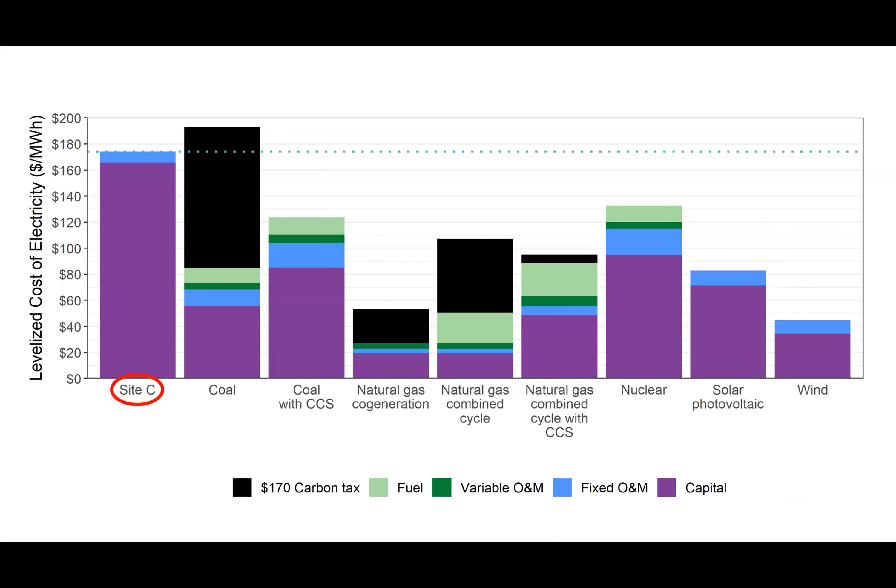Here's that levelized cost with that larger capital cost of 16 billion. You can see Site C at that cost is very expensive, more expensive than any other technology in our model, except for coal if you put a $170 a ton carbon tax on it.

But levelized cost isn't going to give us the full picture of the value of Site C. You can't directly compare Site C, which is dispatchable, with wind energy, which is not dispatchable, based on levelized cost alone. So we start with this analysis thinking there might be additional value that Site C has when operating within a system, helping provide dispatchable capacity. Let's evaluate that value and get a sense of how valuable Site C is.

For this work, we're using a linear programming model. The basic framework is the same as the 2018 paper, but there we looked at all the provinces; here we're just looking at two with greater detail. It's co-optimizing several things: when we run a modeling scenario, the model decides which technologies to invest in and build, whether to build transmission between balancing areas within and between provinces, and whether storage facilities should be built.

Then, based on the available capacity, it's also dispatching these technologies over the course of a year for each hour, and dispatching transmission between regions. To give shape to this model, we have intra-provincial demand detail, generation detail, and transmission detail.

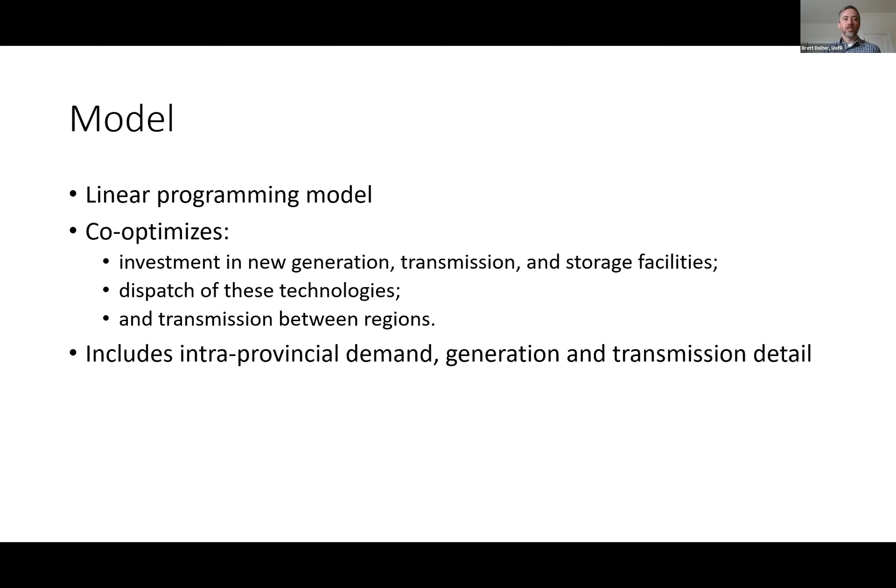That would be ideal, and we'll keep hoping... pardon me? Oh, okay.

For Alberta, we're using data that is actually regional. Alberta's AESO has planning regions with hourly electricity demand, which we then aggregate to the economic regions.

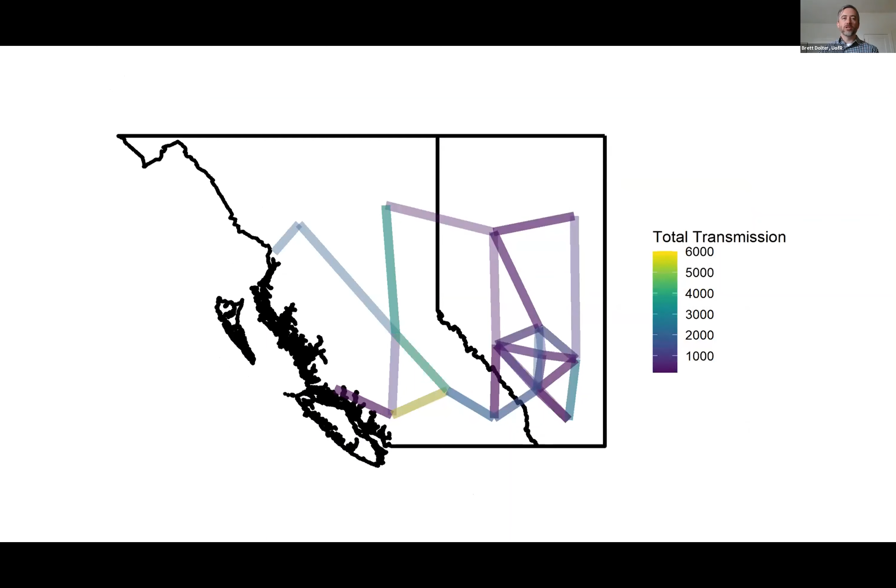We have rich wind and solar data, and when we started this modeling work, we really wanted to see, based on the resource that's available, how greater wind and solar generation would play a role in electricity futures, and what would be needed to balance it.

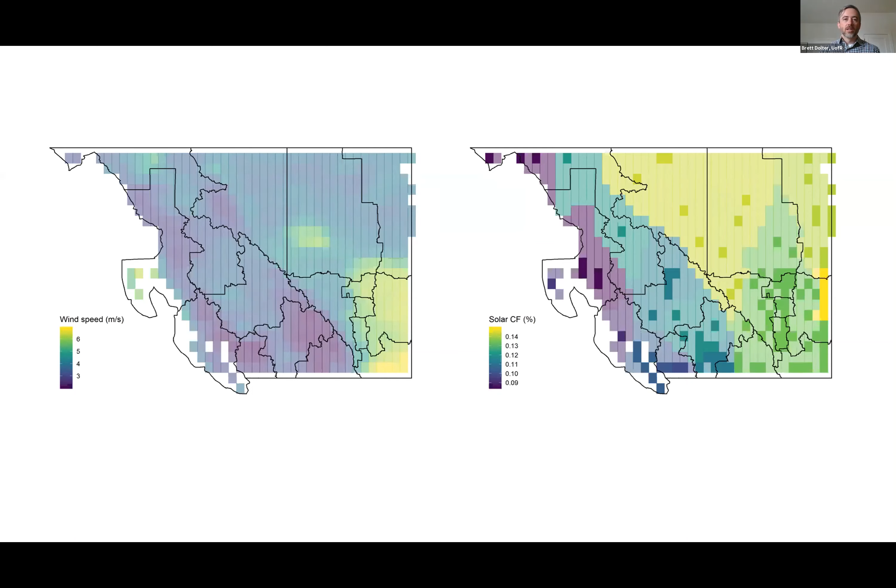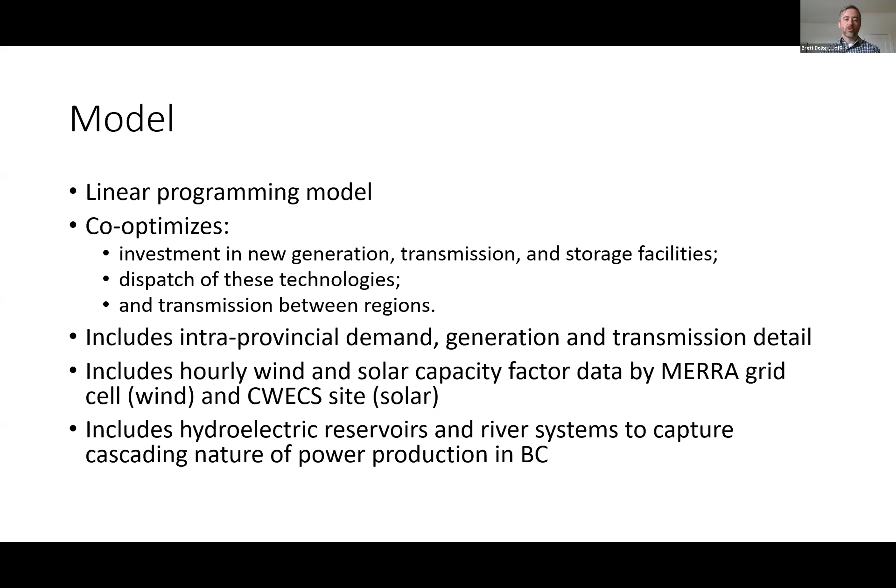Because BC is a hydro-dominated system, and it's important to capture how that system works, in this version of our model we've really worked to give greater detail to the hydroelectric system in BC, characterizing the river systems and the chained nature of hydro on the Williston Basin. The generating station there is GM Shrum, and output from that station becomes an input to the Dinosaur Reservoir.

My internet is unstable. Can you hear me okay? If not, let me know when I can turn off my video. Still okay? Yes, it's a bit unsteady. We're losing you a bit. Yeah, maybe let me turn off my video and see if that will help.

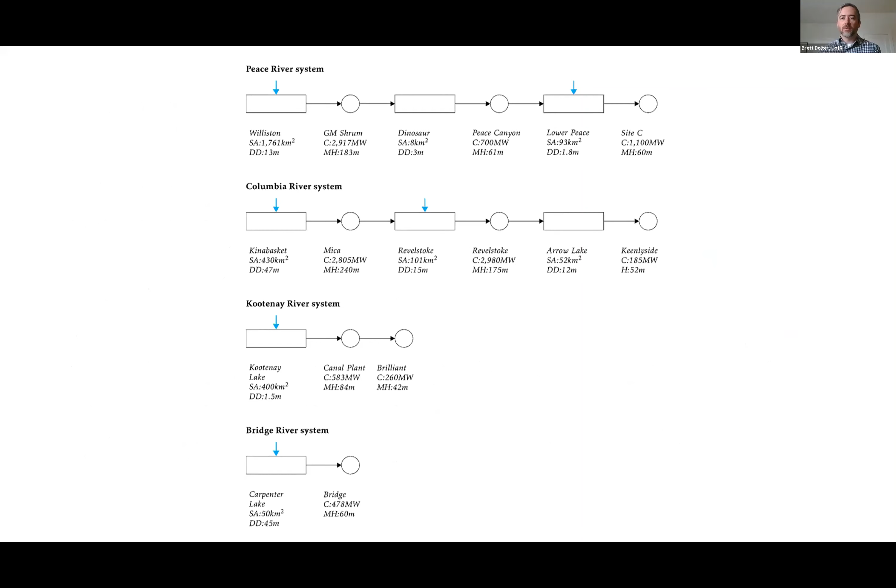So there's the chained nature of the hydroelectric system. Output from one generating station becomes an input to a downstream reservoir. So we've worked to characterize the big hydro assets within BC to have that more realistic modeling of hydro in BC.

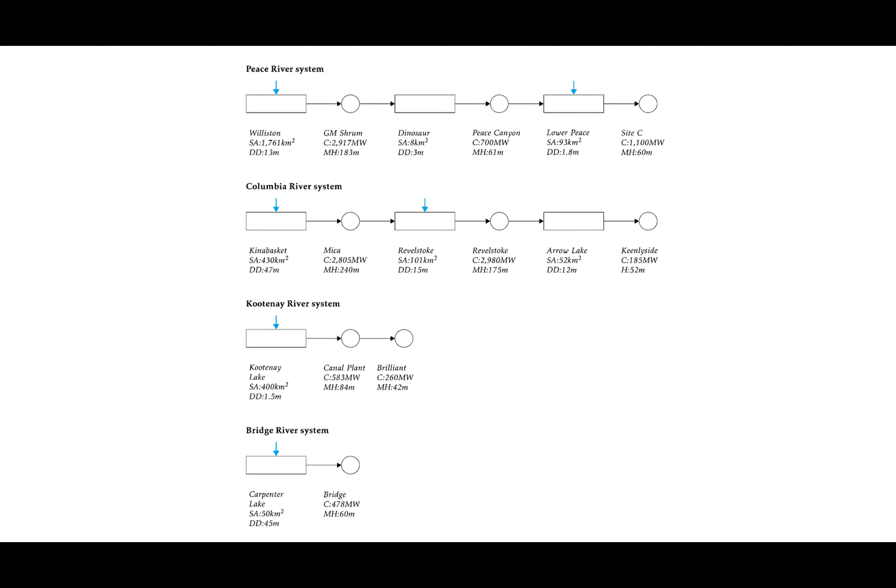Now, of course, the constraints, the ones you'd usually expect: you've got to have electricity supply greater than or equal to demand in each hour and each balancing area. So we have costless curtailment as one assumption we've made. Supply can be greater than demand.

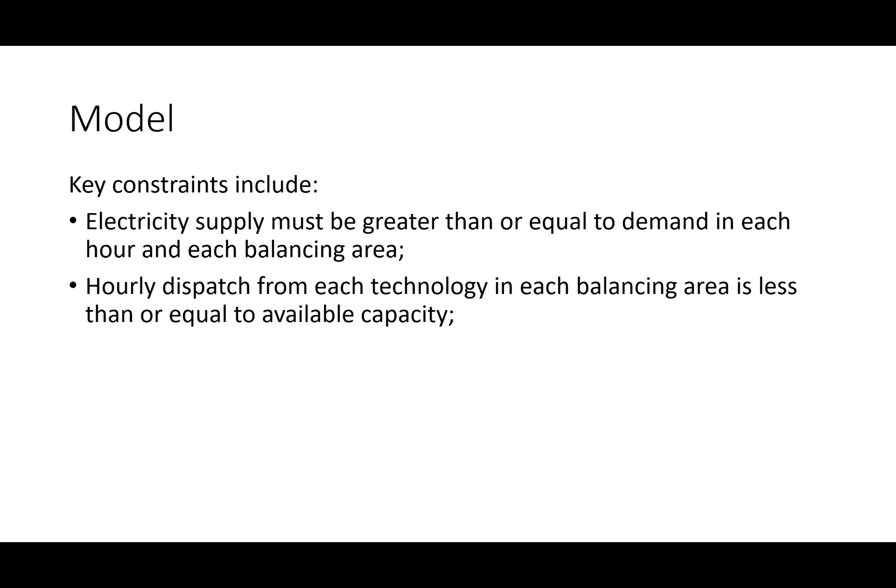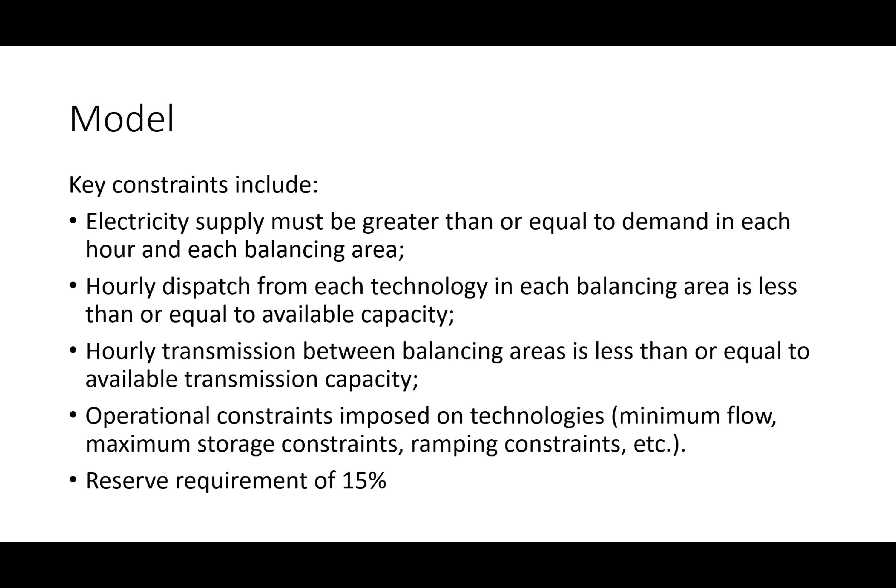You can only run what you build, so dispatch has to be less than or equal to available capacity. Transmission, same thing - you can't trade what doesn't have transmission to transmit. And then we have constraints on the minimum flow requirements for hydro facilities, maximum storage constraints for the reservoirs, ramping constraints for different technologies, how fast they can ramp up or down and respond to changes in demand. And we introduce a reserve requirement of 15%.

So we run this model for each scenario we want to evaluate. We run it with Site C assumed to be built within the model, and then we run the same scenario with all the same settings with Site C not in the model. That's going to give us an idea of what is the replacement value of Site C - if you have Site C present in the model, how much are you saving, and how much are you not having to build?

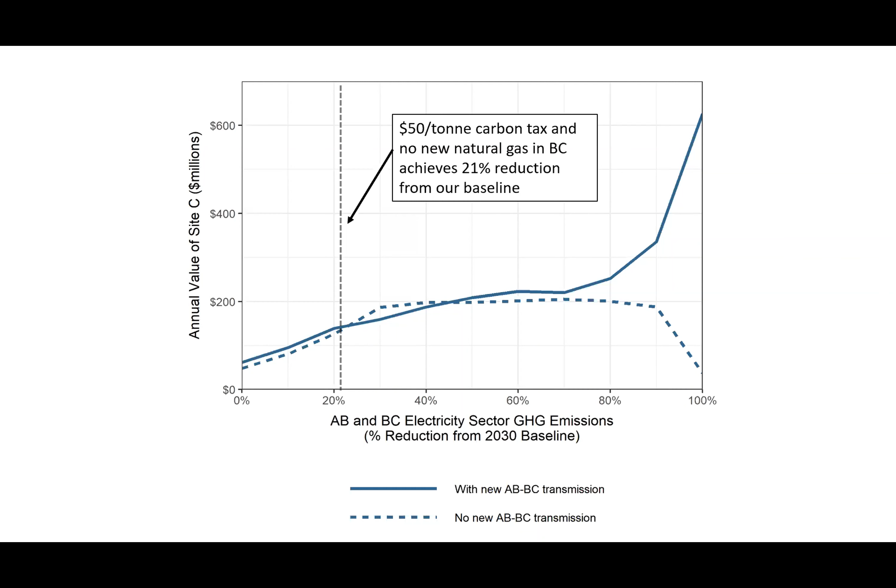It does increase with higher levels of demand. Site C is more valuable. So we include that in our net present value, that the value of Site C is growing as demand grows. But if we take that annual value, assume it grows over time, and calculate net present value over 70 years, the expected life of the hydro facility, here's the net present value calculations we get.

I've put on the graph the total cost of the Site C project with this new $16 billion budget, but also a line showing the avoidable cost. When Premier Horgan announced he was going to continue Site C, he said we want to continue because if we stop now, we would already have spent a little over 10 billion, and so we'd only be able to avoid 5.8 billion. So we get that avoidable cost of 5.8 billion.

We can look at, does Site C achieve it? Does its cost exceed the net present value that the project creates? It exceeds it for every scenario—the total cost is higher than the value created. But for only two scenarios that we run, is the value created greater than that avoidable cost.

Only if you're working to get to 90% or 100% reduction in emissions, so near zero or zero emissions, and you have collaboration between BC and Alberta, do you generate value that exceeds that avoidable cost. From an economic perspective, it's that avoidable cost that is relevant to the decision. The other 10 billion is a sunk cost that as rational decision makers we can ignore. It's that 5.8 billion we need to evaluate, and only in two scenarios do we exceed that value.

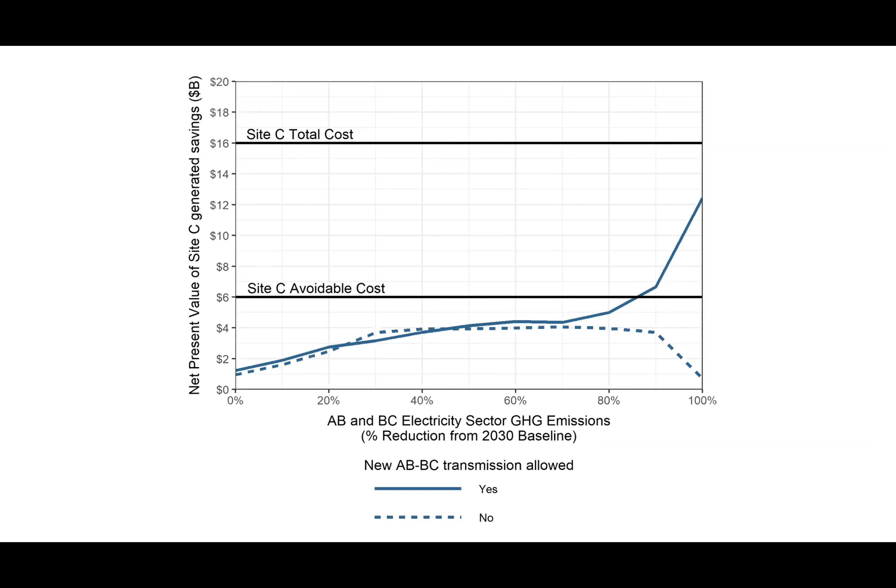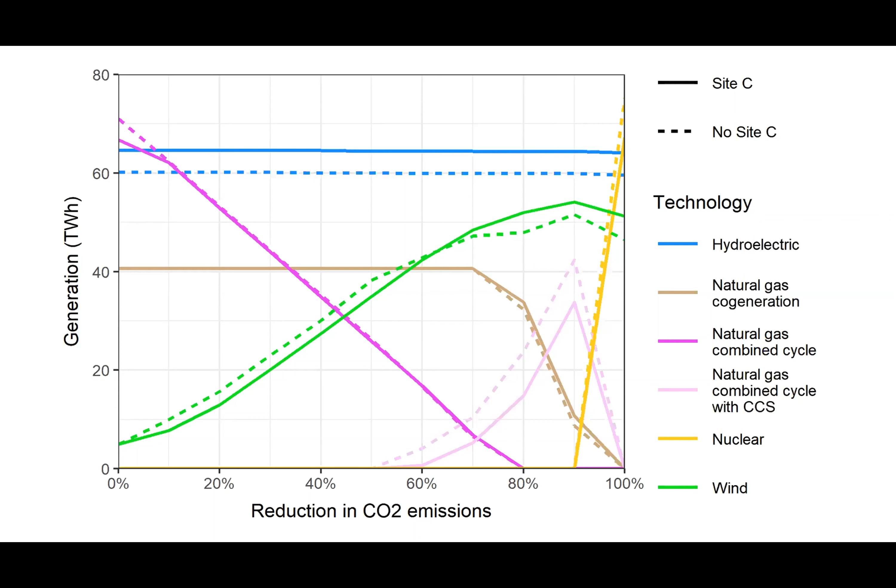Carbon capture and storage—I live in Saskatchewan, we know that was an expensive project at Boundary Dam 3. Nuclear power plants are also frequently subject to cost overruns. So we want to look at how sensitive our results are to the cost of those technologies.

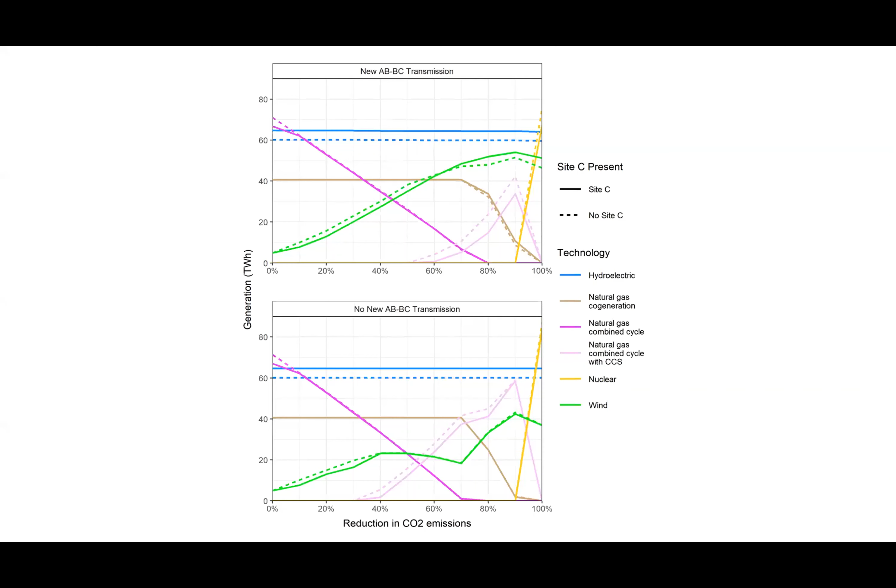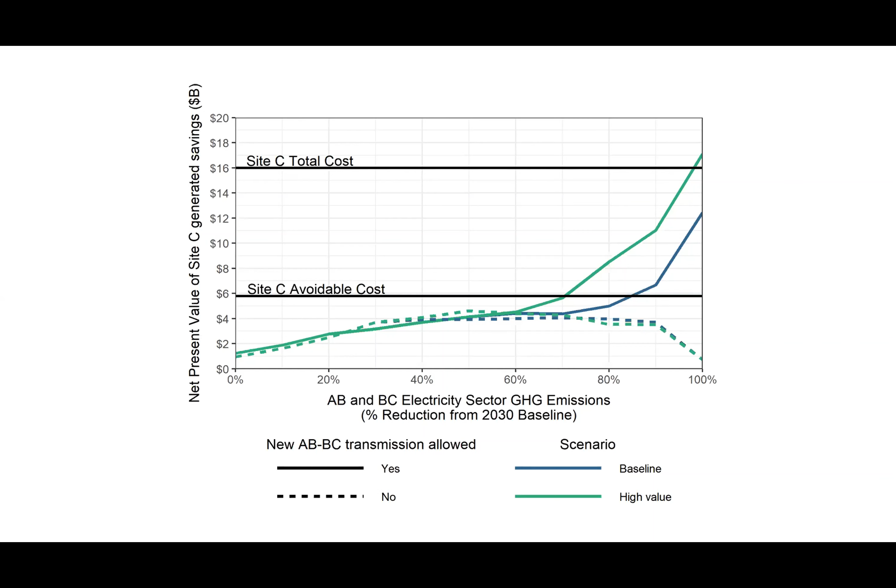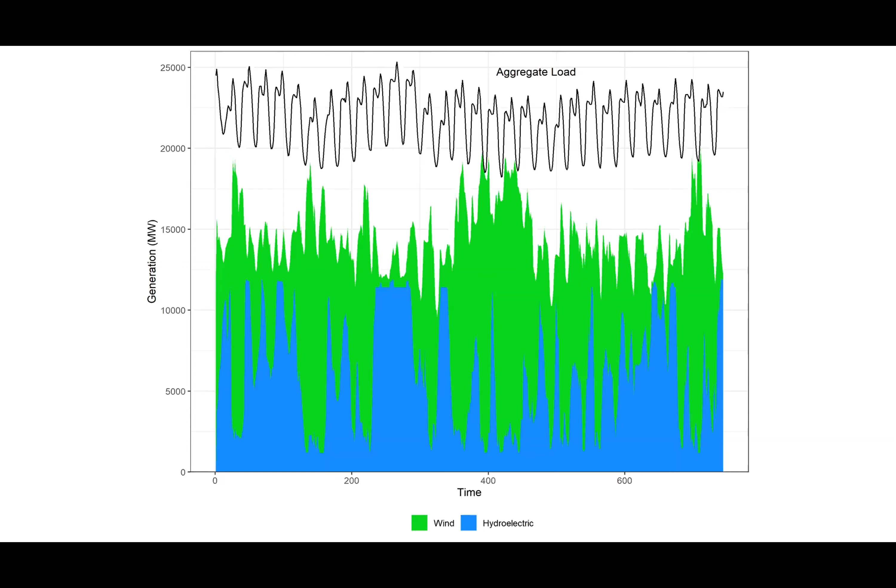So there's a complementarity between wind and hydro in the model. Aggregate load is the top, the black line. And we see the same if we do just a scatter plot of output from wind and output from hydro. There's that relationship that when wind is strong, we lower the hydro output, and when wind dies down and we're not getting the generation from wind, we have more hydro output.

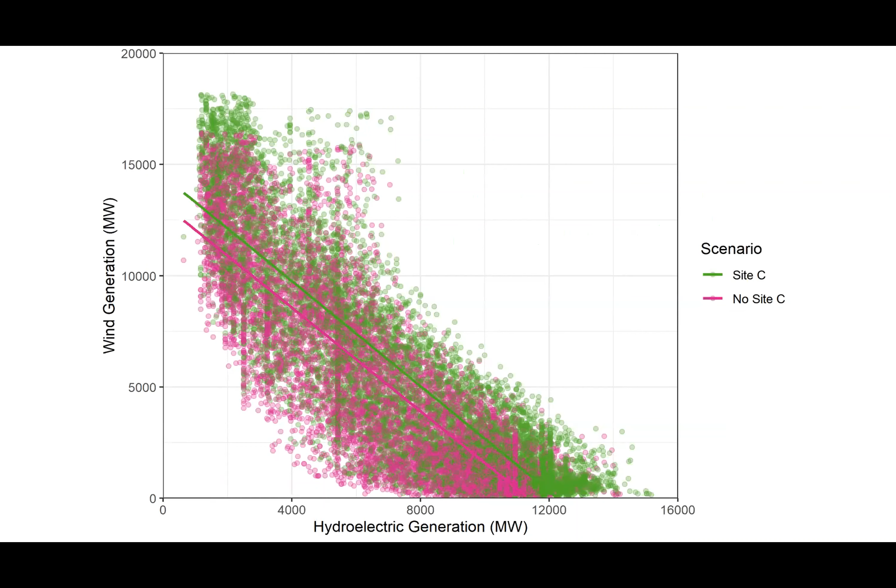And the last thing I just wanted to show you is that we're looking at the value of Site C, so we're looking at scenarios with and without Site C, but the transmission assumption is actually pretty important. So if we just look at the value of transmission, assuming we can build it or not, and compare scenarios along that line, we see that transmission has quite a high annual value.

So this is, if you allow new transmission to be built between Alberta and BC, the value of that transmission is high, and it increases as we work to decarbonize. And so some of our future work, we're going to look more at that transmission value and what we can do there to encourage transmission and evaluate its cost effectiveness for situations like this, where you have a hydro neighbor like BC beside a province like Alberta with a very strong wind resource.

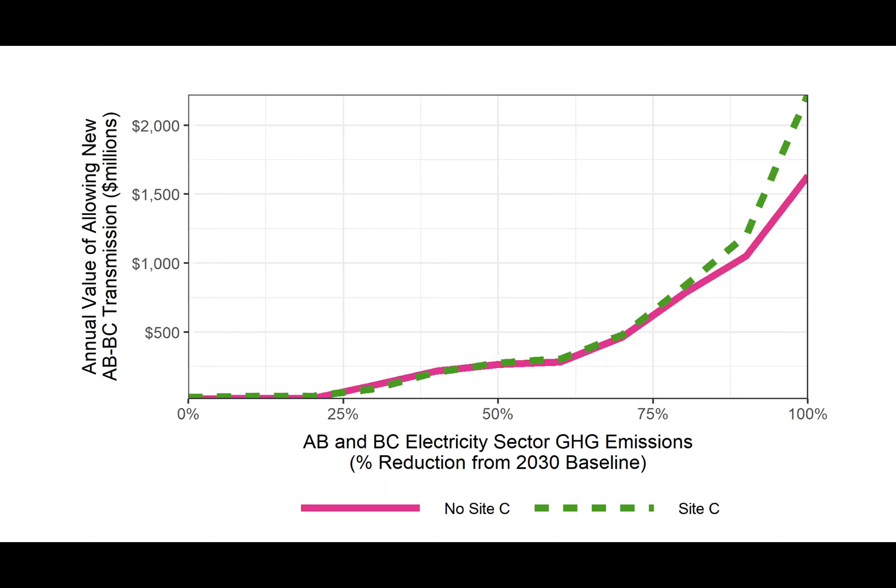This was constructed from 1909 to 1913, and because costs went up, the city of Prince Albert stopped the project before it was completed. They had a debt at that time of $3 million, which in those days was a lot of money, and they only finished paying for it in 1965, over 50 years later. So these hydro projects can be expensive, and other places have abandoned them in the past and have had to live with the debt. BC has now decided to go forward with it, unless perhaps they find more cost increases.

But let me stop there and take any of your questions.

Thank you, Brett. It was an interesting presentation. There is already a question by Andrew. Please, Andrew. Good afternoon, Brett. Two questions, and maybe I'll place both out there, but if you want to answer one, maybe other questions from other folks should go first before my second question.

My first question is, did you take into account the total power demand growth of aggressive electrification for climate change? I look at your demand graphs and it seems like there's 70 terawatt hours of demand, which to my mind doesn't address electrification. BC's energy portfolio at the moment, only 17% of our entire energy portfolio is electricity, 83% is fossil fuels. So if you compare on a joule by joule basis, and account for perhaps clever transportation schemes that are more efficient, electrical engines are far more efficient, we've still got to double at minimum our electricity system in BC, and we currently use 60 terawatt hours. So when you look at the value of Site C, to me it's very important that you do it through the lens of future demand by 2050. And if I'm mistaken, forgive me, but I didn't see that significant doubling and quadrupling of power that we're going to need if we're truly going to address climate change.

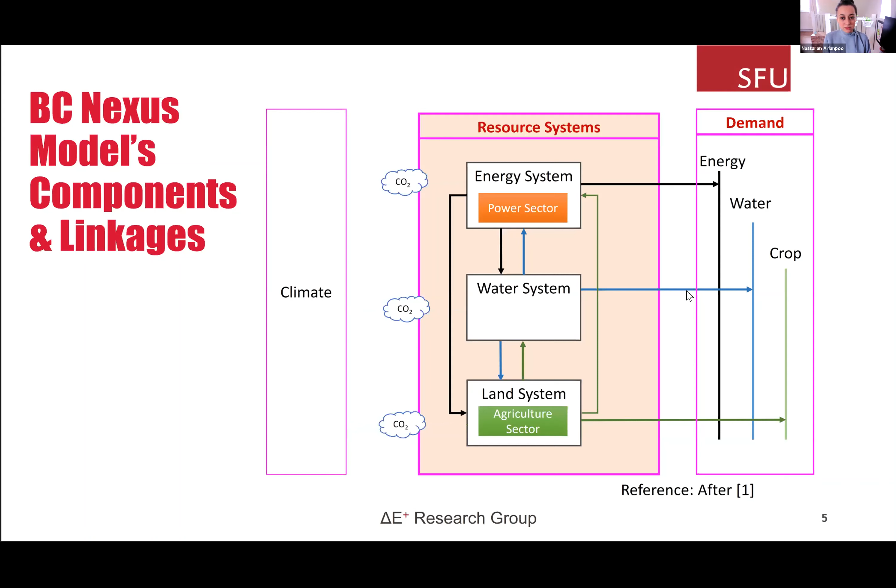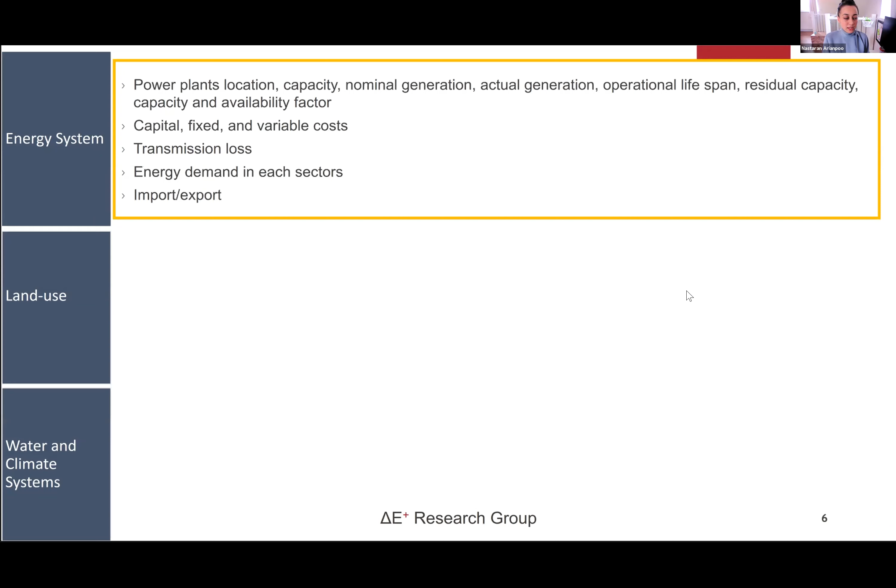When we designed the structure of the model, we calibrated it with the BC portfolio. Within the energy system, we collected data such as capacity, nominal generation, actual generation, the lifespan of the power project, the residual capacity, cost information, the energy demand from different non-electrical fuels in each sector like residential and commercial, and data about import and export of fuel.

Within the land system, we collected data such as the land use type, sizes, and demand projections for the modeling period. We also provided the model with crop suitability estimation data for each part of BC, so we can give the model a chance to expand agriculture to meet future demand. We use the model named Global Agroecological Zoning to provide this data for our model.

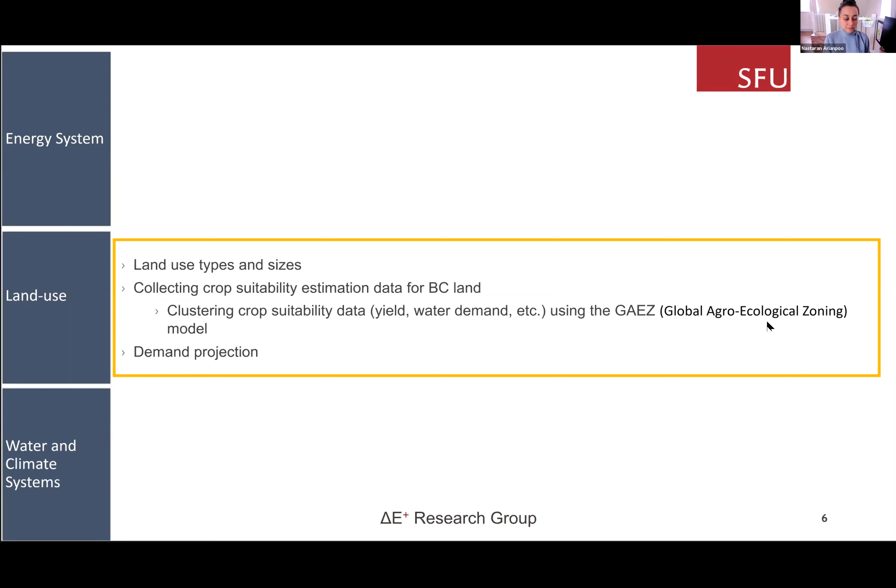The current version of the model, which is the first version, only tracks water demand and availability and CO2 emissions. So it's not a two-way interaction at the moment.

One important piece of information in the model is forest carbon uptake. Forests can play an important role in climate change by absorbing CO2 from the atmosphere. In our model, we can assign a negative value of variable cost to forest land, so the model includes reforestation considerations within the optimization analysis.

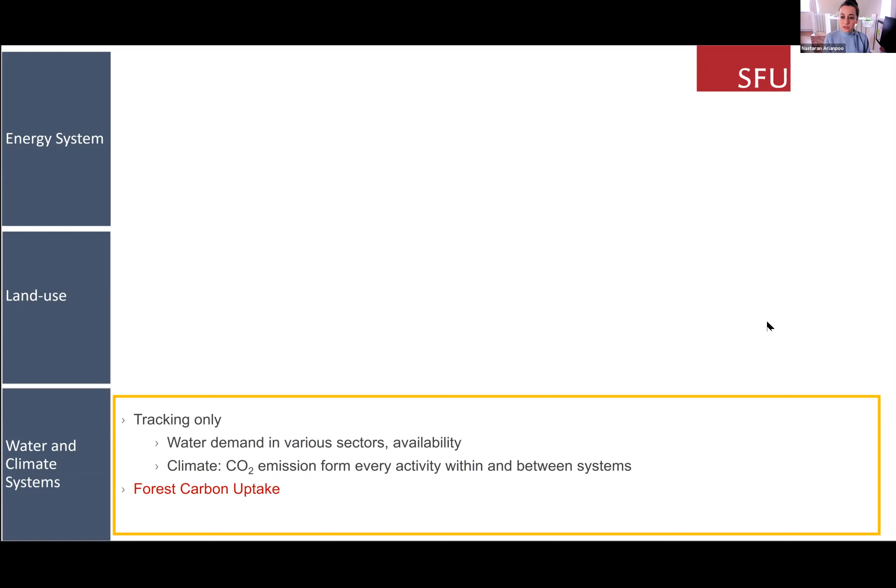However, at the time of preparing this presentation and EMI report, there was ambiguity about the role of Canadian and BC forests in how much they absorb CO2 compared to how much they emit. So in the scenarios we're reviewing today, we didn't include this option in any of the scenarios.

Three decarbonization scenarios were investigated for BC between 2030 and 2050. Our baseline scenario was based on Canada's Energy Future report published in 2019. We chose this as our baseline because the report takes a very moderate approach toward the electrification and decarbonization of BC's energy.

The other scenarios, scenario 1 and 2, are variations of this baseline with more aggressive electrification toward the 2030 and 2050 energy system. In the first scenario, we did not put any carbon penalty in the model. In the second scenario, we put a carbon penalty in the form of a carbon tax to investigate the changes.

So we investigate three scopes in these scenarios: first, the technology mix in the power system to meet demand; second, the magnitude of impact on water and land; and third, whether we can meet the CO2 emission targets in BC.

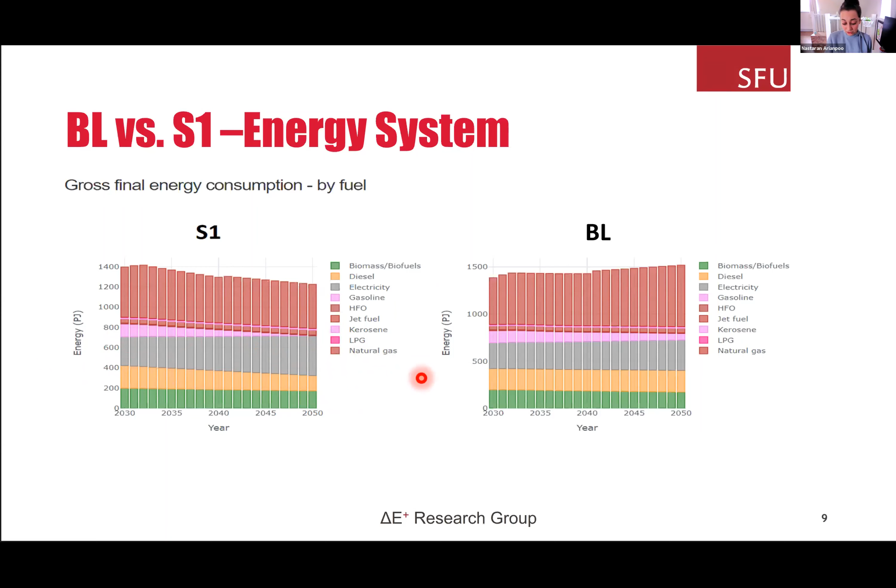That's because the model just used the natural gas as a standby to serve as a reserve margin. So that means we are building capacity that we may never use, just because we need to provide a stable supply.

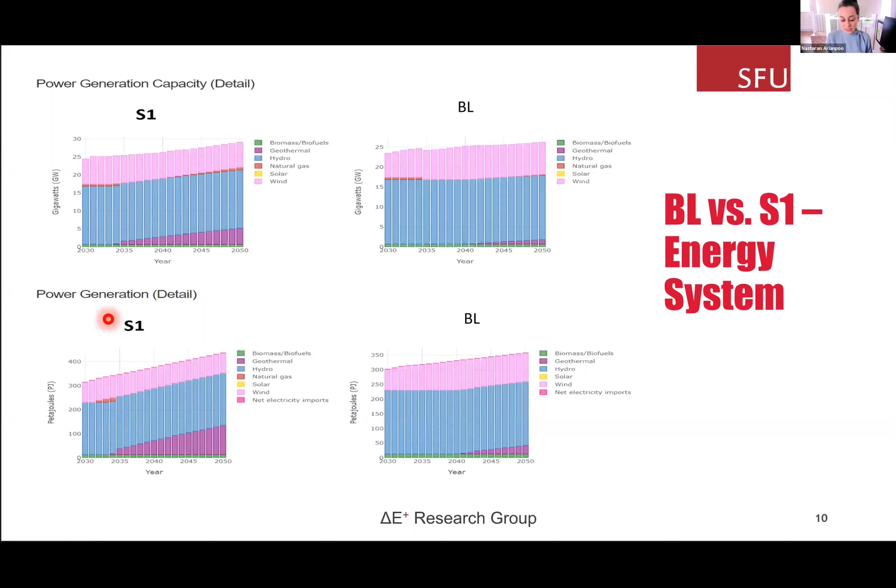The first encouraging observation of this scenario is that the impact of electrification in the residential, commercial, and transportation sectors is low on the land and water system based on the model output.

And the reason can be that the model didn't decide to further invest into solar, which reduced the land use. There is a low biofuel demand from the agriculture sector in BC, which again reduced the land use from power generation, because most of the biofuel demand in BC comes from municipal waste and forest. Also, because we did the electrification, we were moving away from fossil fuel, which minimized the impact of the power energy transition on water use.

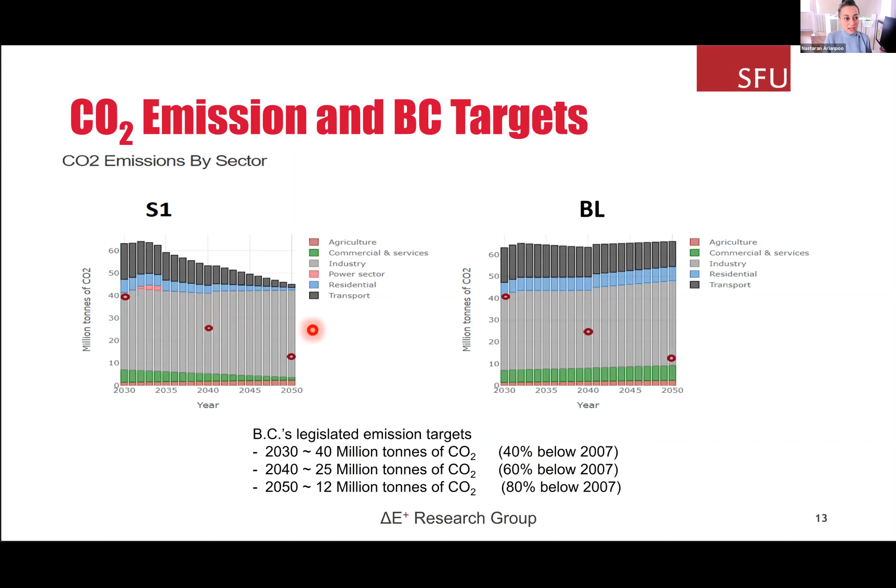So some of the key findings, to summarize from our scenarios: one, the model didn't choose further investment in solar generation capacity in any of the scenarios, despite the low development cost. The reason is due to the low solar irradiance recorded in the only solar power project we had in BC.

It was a low water and land impact in our electrification scenarios, which is very good news. So we can electrify our sectors with a low impact on water and land. And the baseline and first scenario highlighted the significant role that baseload energy options play in power grid stability.

To meet the provincial CO2 emission targets, the industry sector has a significant role, and further investigation of how we can reduce our emissions in the industry sector is very important. The result of the second scenario suggests that policies such as carbon tax can change the timeline and direction of investment in the technology mix, which is a very important note.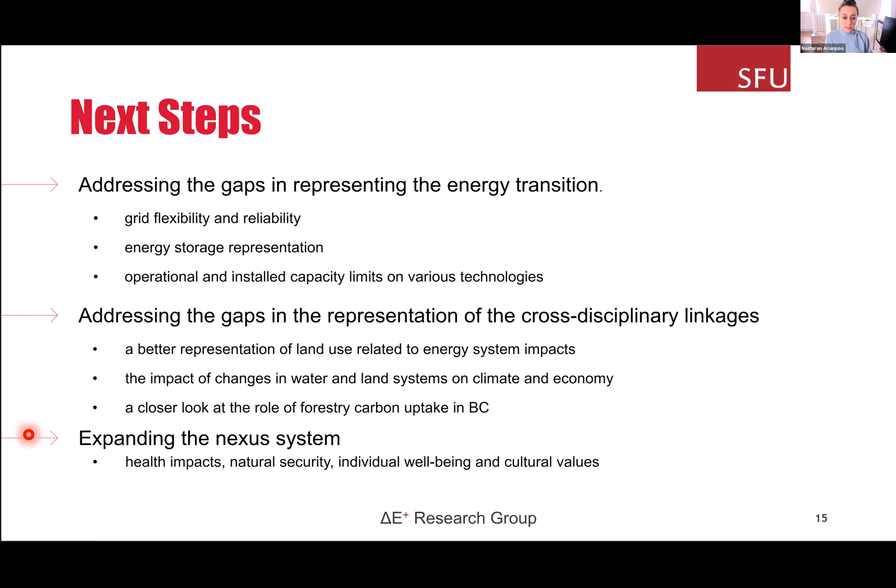So the next step for our modeling involves three major directions we are going to investigate: addressing the gap in representing the energy transition, addressing the gap in the representation of cross-disciplinary linkages, and investigating the possibility of extending this Nexus model to include social and biodiversity elements such as health impact and natural security.

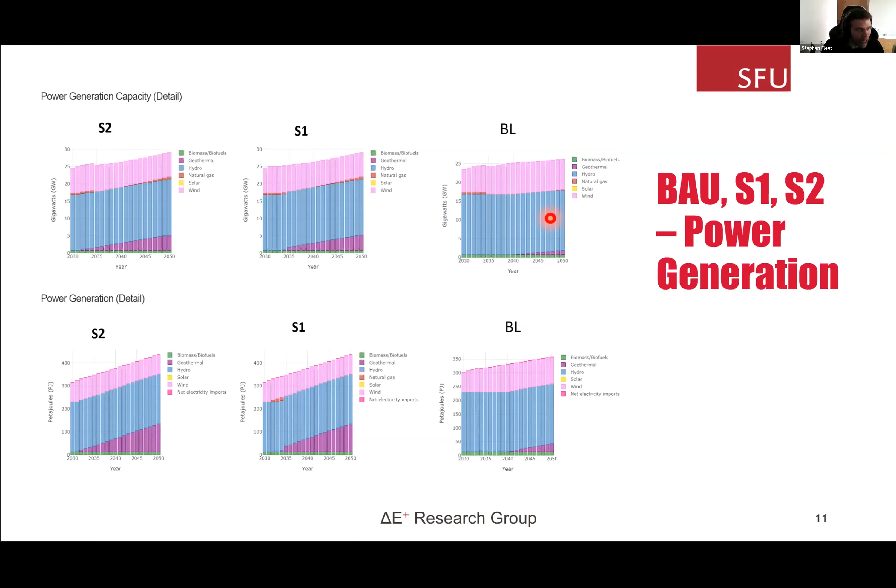Yeah, I'm just wondering what the carbon tax was factored at, if it was like a growing carbon tax, maybe a couple of different scenarios could be set up to evaluate that. I'm just curious about that aspect.

Yes, for this scenario, for the second scenario, we just followed the federal carbon tax because BC is kind of following the federal carbon tax. So we used that, but it's a very interesting area for future work as well, because as I mentioned in the second scenario, despite the carbon tax, the model still invests in natural gas. We'd like to invest more and see at what level of carbon tax the model moves away from natural gas completely and invests in other sources of energy.

So we have it set at 50, but it will be moving to 170 by 2030. And then we did it linear, well, in the federal plan I think they say $15 per year after that, so we follow that. But as you mentioned, it's an area where you can play with the number and see which one gives us the better answer.

Yeah, and can I ask a second question, unless somebody else wants to jump in? No, please do. So my second question is, you mentioned something about EV uptake increasing over time, and I'm just wondering if electric rail is factored into these models. I know we had some previous presentations, and I've had a look at one of those models, and I can't quite clearly see that electric rail, like subway or trains. I don't get a clear indication that that's being factored in. So I'm just curious if that is situated in your model at all, or just EV?

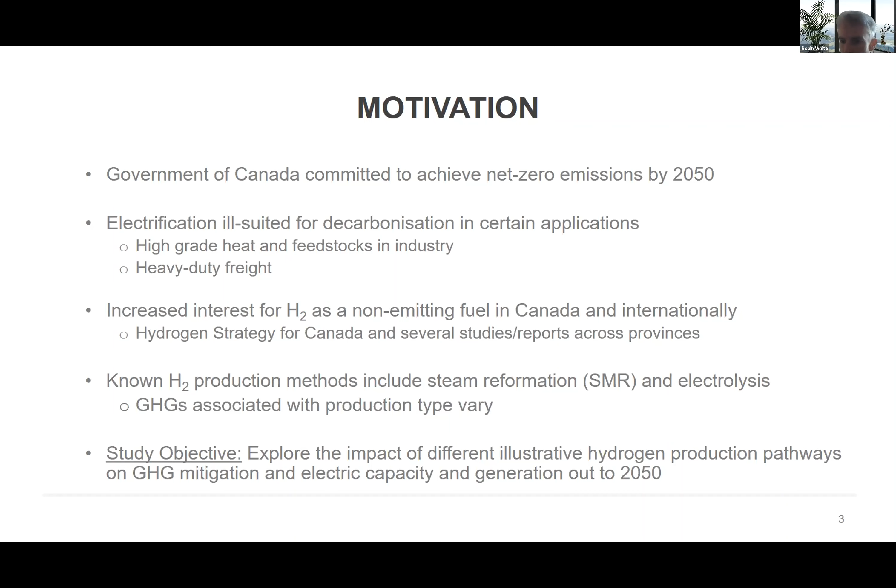The modeling framework that we're using is Energy 2020. It's a multi-sectoral, bottom-up energy end-use model. We have about 70 sectors and 35 fuels. It's a partial equilibrium or system dynamics model that simulates consumer behavior.

It tries to account for the fact that consumers are not necessarily making economic choices. It doesn't fully equilibrate government budgets and markets for employment and investment like CGE models, and it models individual years, so it's modeling the path to get to various different emission targets.

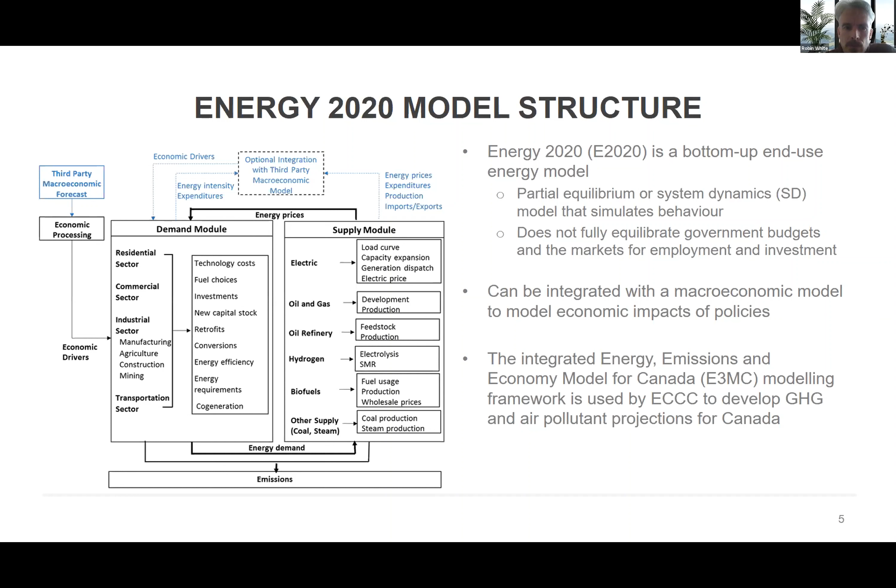Our electricity supply sector is a detailed unit-by-unit representation. We have 24 different electric plant types, such as solar PV, onshore wind, oil, gas combined cycle, and coal with CCS. We have exogenous historical units in the modeling framework, but we also can build endogenous units throughout the projection year to meet any electricity demands.

The model also represents a transmission network, represented by a node in every one of the provinces within Canada and Labrador. The model determines the amount of electricity needed at each node by minimizing the cost to meet demands from all the sectors. The generating units are dispatched across 6 time periods in each of the winter and summer seasons.

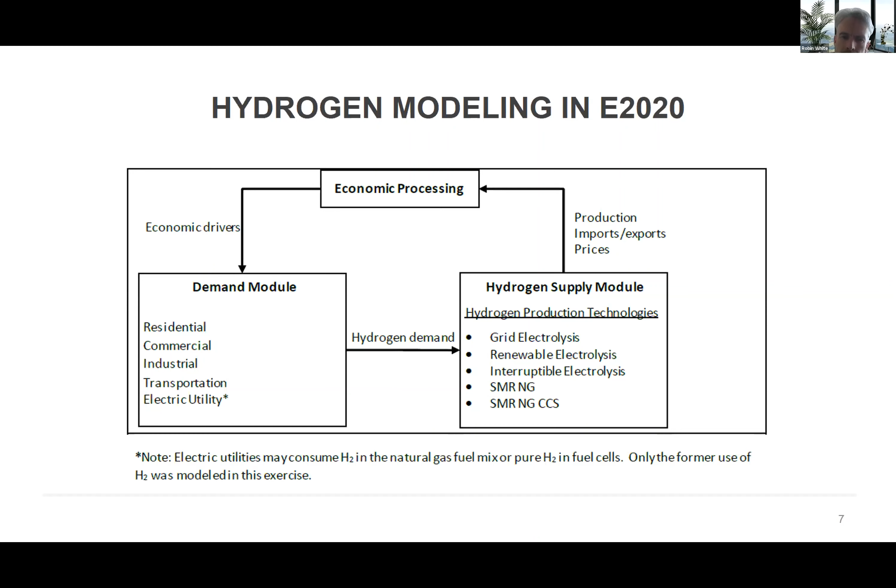The data sources that we use for our model are StatsCan for the energy data and Canada's National Inventory Report for GHGs and air pollutants. We draw most of our technology parameters from the US Energy Information Administration and the National Renewable Energy Labs from the US. The prices are based on Canada's Energy Regulator.

They provide us with wholesale oil and natural gas price projections. Our drivers for the model are GDP from Finance Canada, population growth from StatsCan, and oil and natural gas production projections, also from the CER.

The reference scenario that's the basis for our modeling work is based on the reference case for Canada's GHG and air pollutant projections 2020. It includes all policies and measures that are funded and legislated as of September 2020, so it doesn't include Canada's Strengthened Climate Plan measures, such as the $170 carbon tax.

The output-based pricing system also wasn't incorporated into the hydrogen producing sector. We do cover output-based allocations in sectors like chemicals and fertilizers, upgraders and refineries, but we didn't attempt to cover that for hydrogen production in this modeling exercise.

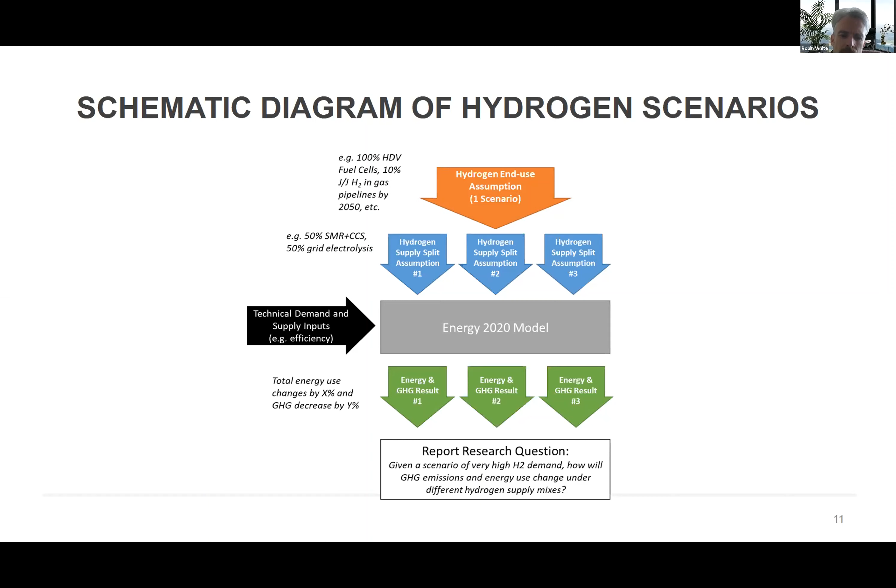Those were then run through our model, and we looked at the energy and emissions coming out to compare the different scenarios, to see what implications the chosen pathway had on energy use and GHG emissions.

For our demand assumptions, we put in natural gas distribution pipelines up to a 10% by energy basis of hydrogen in the fuel mix, added in feedstock and coke replacement in iron and steel, and added 100% sales in HDV trucks with hydrogen fuel cells by 2050.

The electricity grid expansion that we incorporated into the model was based on a portfolio approach that favored wind and solar, with some smaller amounts of gas and peak hydro. These were the amounts of different kinds of capacity added in order to meet the increased electric demands from electrolysis.

The scenarios ran different fractions of electrolysis sourced through grid, renewable, and interruptible power, and natural gas combined with CCS, increasing over the projection period from 0% to 90-95% sequestration by 2050.

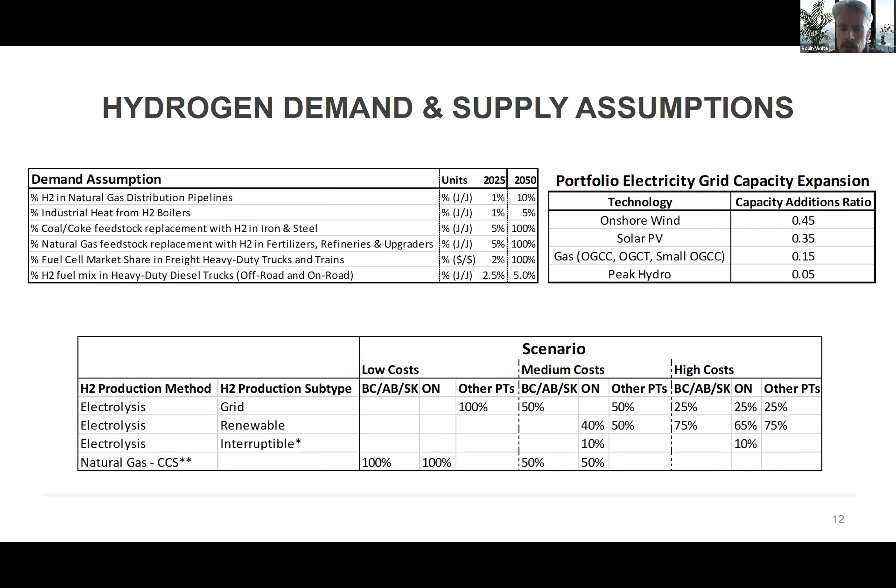And now we'll switch over to Tuo, who will go over the modeling results and analysis.

So we don't hear you.

So under the microphone button in the lower left, you might have to change your input microphone. Sometimes Zoom selects the wrong one.

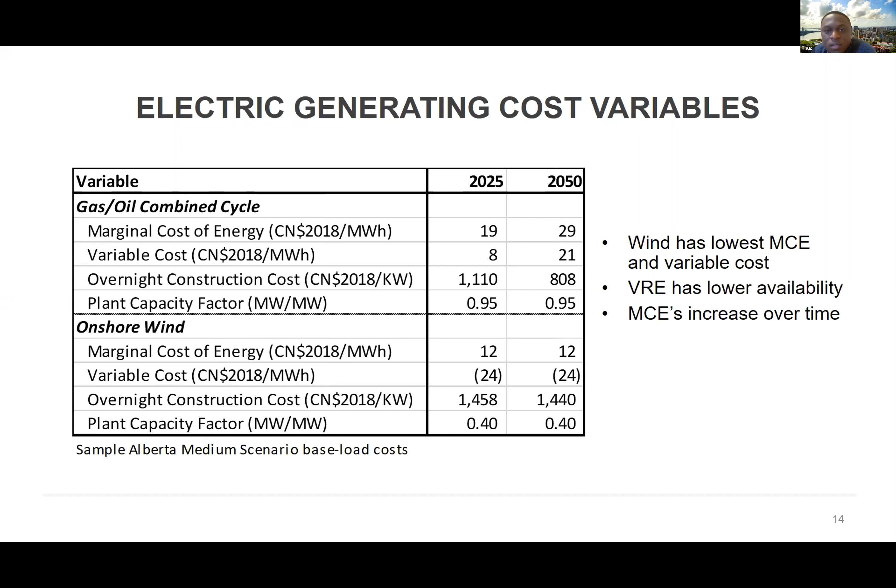I think it's also worth mentioning that our assumption on the efficiency of electrolyzers is quite conservative compared to other sources. If I remember correctly, by 2050 the efficiency of our electrolyzers is around 66%, going from 61 to 66 between 2020 and 2050.

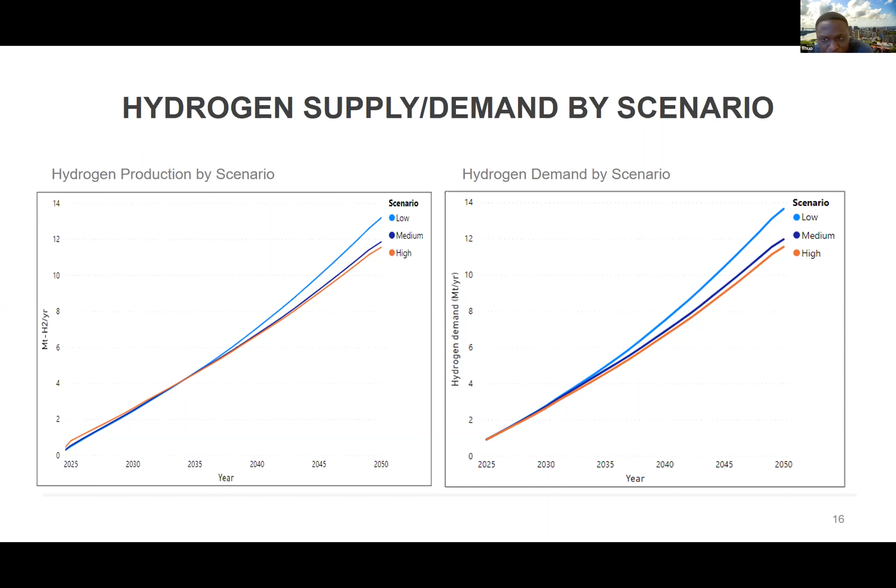Some big provinces do not produce hydrogen using renewable electrolysis for the medium scenario. By big provinces, I mean British Columbia, Alberta, and if I remember, Saskatchewan as well.

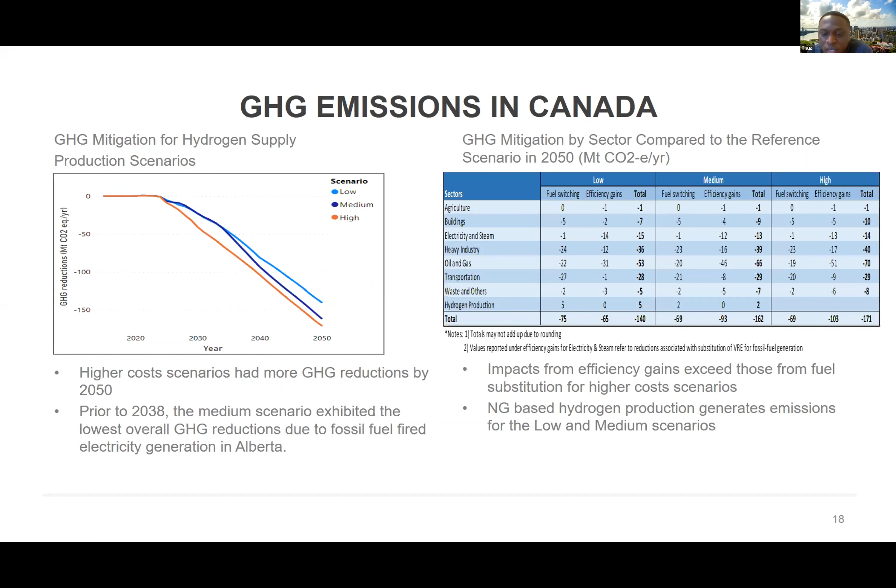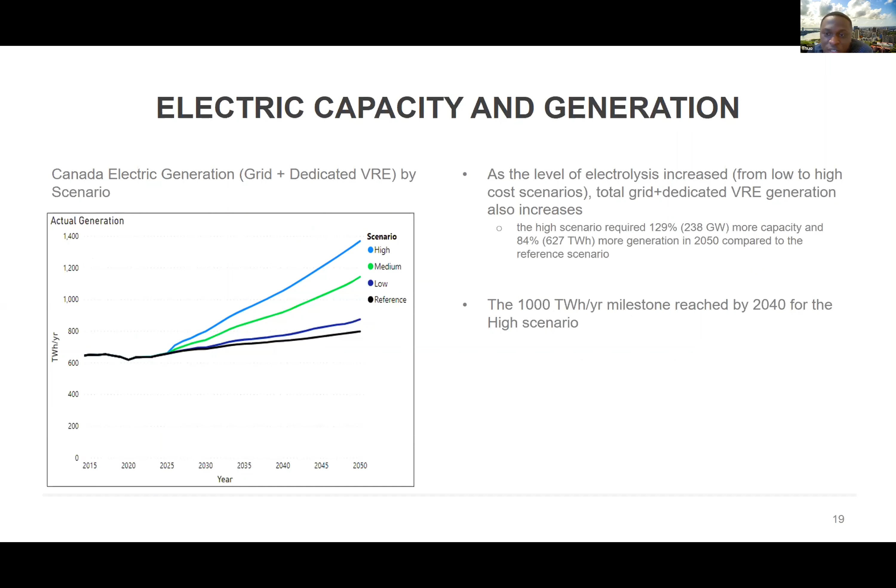What is also interesting to see here is that we reach and exceed the milestone of 1,000 terawatt-hours of electricity generation before 2050 - I think it's around 2040. That gives us a sense of the magnitude of electricity needs in the future.

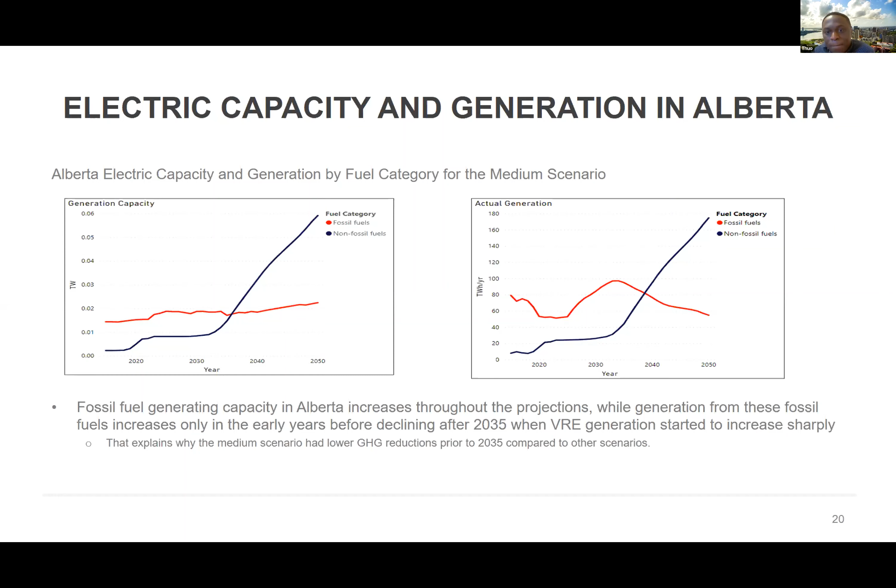Our modeling revealed that we'll need to be working on making refinements to the electricity capacity expansion and dispatch to allow extra VRE capacity to compensate for the limited availability of wind and solar resources. We'll also need to look at improving the electricity storage dynamics and reflect any seasonal generation differences that could be utilized for hydrogen storage and those kinds of things.

So in conclusion, we demonstrated that our model is capable of evaluating the economy-wide GHG and electricity impacts of different hydrogen supply pathways. And we showed in our particular modeling framework that emission reductions were between about 140 and 170 megatons by 2050, and those were accompanied by significant increases in the electricity generation and capacity to support the electrolysis.

But obviously those are highly dependent on the level of VRE integration that can be assumed, and those are dependent on capacity factors for wind and solar, transmission links between various different provinces, and preferences by various jurisdictions for different kinds of technologies. So with that, we'll conclude there. Thank you.

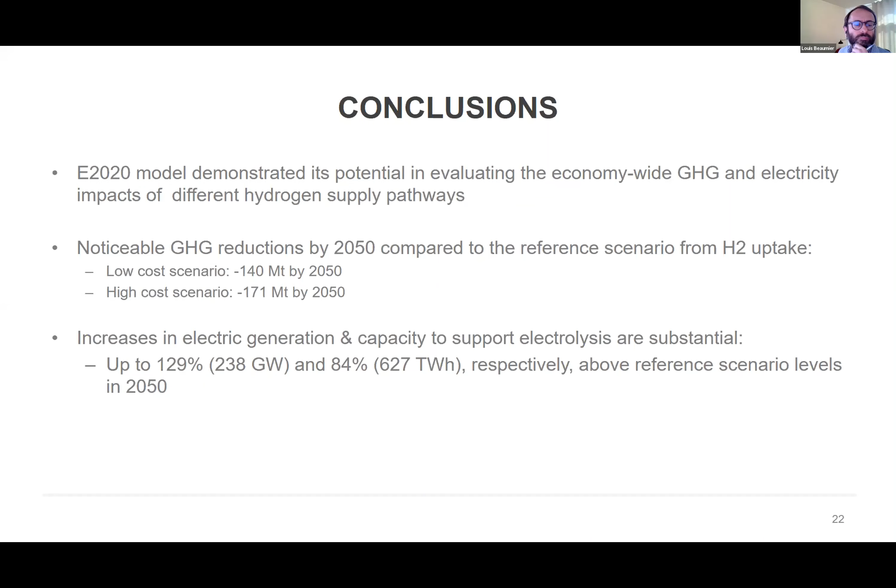Normand, please go ahead. Yes, you put the cost of hydrogen in the modeling section. So are these costs extracted after modeling, or are they in the model? Well, the reason we put that in there is because it's somewhat of a hybrid. Some of the inputs are, I mean, they're inputs, but the electricity costs are actually outputs of the model, because it's highly dependent on what goes on the grid.

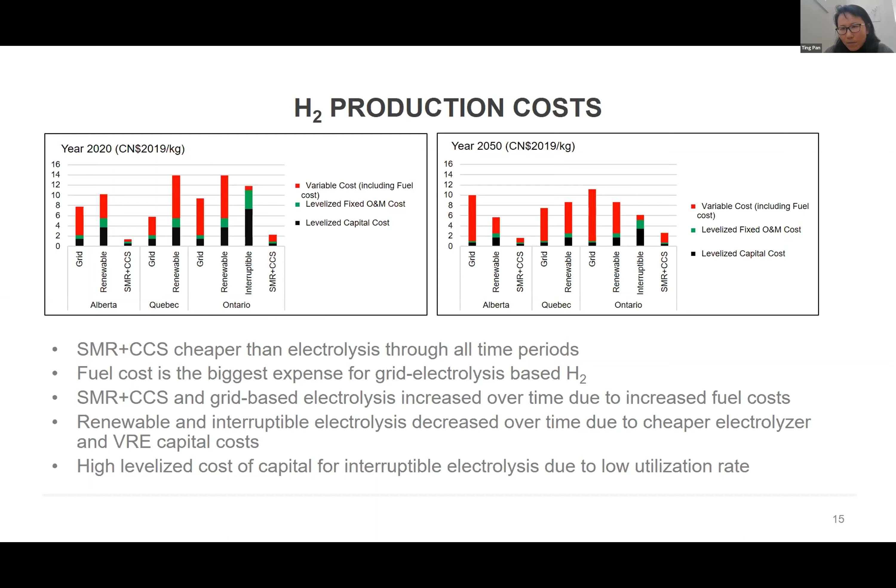The other question I have is about grid electricity. There's a life cycle carbon emissions associated with all of these production pathways, and different grids have different emissions associated with that. When you're looking at grid electricity generated from hydro, do you include in your assumptions the emissions from the reservoirs? No, those will be included under LULUCF of the inventory, but we don't account for those. Okay, that's really good to know, because in the hydrogen strategy, when they look at the carbon intensity of hydrogen, they actually include it, but in the modeling, it's not included. No, we don't include that. Okay, thanks. Okay, thank you.

Andrew, you have some questions.

I wanted to thank you, Robin, and riff off Claudio's comments and the questions before. I think about battery versus hydrogen for going back to electricity as a pathway, and this is really interesting because the costs and energy density considerations make for a very interesting problem to figure out: what would be the right balance between hydrogen storage for long-term energy capture and storage, and lithium batteries for overnight storage. As we wrestle to find practical solutions to our growth, I think you've laid down some really valuable insights here. So thank you, I really appreciate that. Thank you.

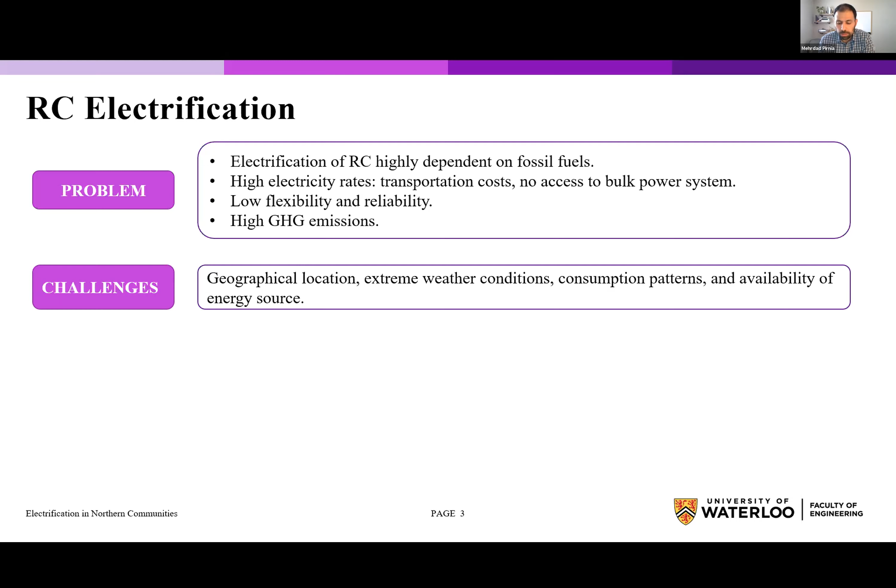The main problem with electrification of remote communities is that they are highly dependent on fossil fuels, which causes higher electricity rates due to higher transportation costs and lack of access to bulk power systems. This also creates low flexibility and reliability in energy supply, and high GHG emissions, which has been a big problem so far. The challenges we face relate to the remote geographical location of such communities, extreme weather conditions and associated consumption patterns, and lack of availability of energy resources in those areas.

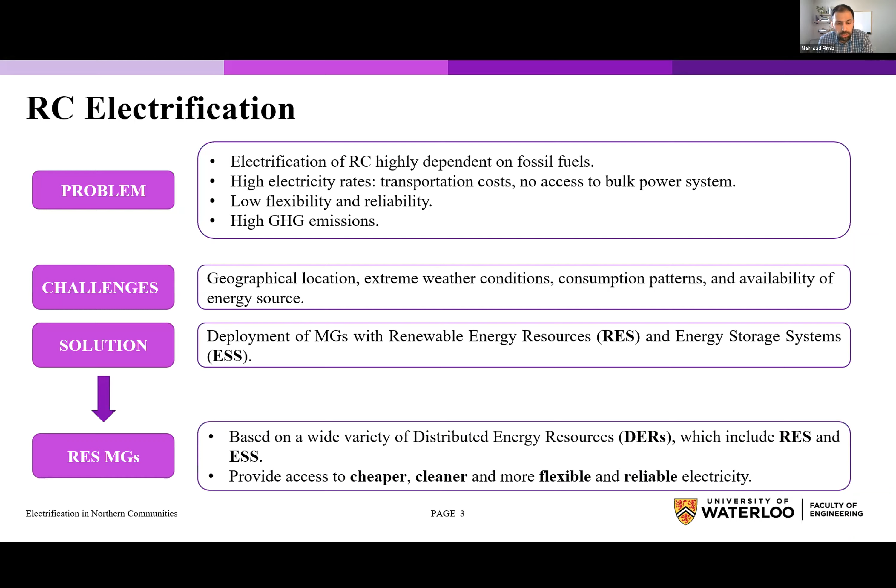To address such challenges that we mentioned, we're going to propose a deployment of microgrids with renewable energy sources and energy storage systems to utilize the available energy sources in such areas, reduce the cost and emission, and provide more reliability. So the electrification model that we have here is to plan an appropriate energy supply mix to satisfy remote communities' demand, and also promote decarbonization using renewable energy sources and energy storage system technologies.

Such model supports Canada in meeting its zero emission targets, and also identifies the most economical size and mixture of the generation resources, and their time of deployment. This is the major contribution of the model.

The model allows quantifying the potential benefits of microgrids with renewable energy resources and energy storage systems. One of the major gaps that we try to fill using the model is the inclusion of hydrogen systems as part of the energy storage system installation.

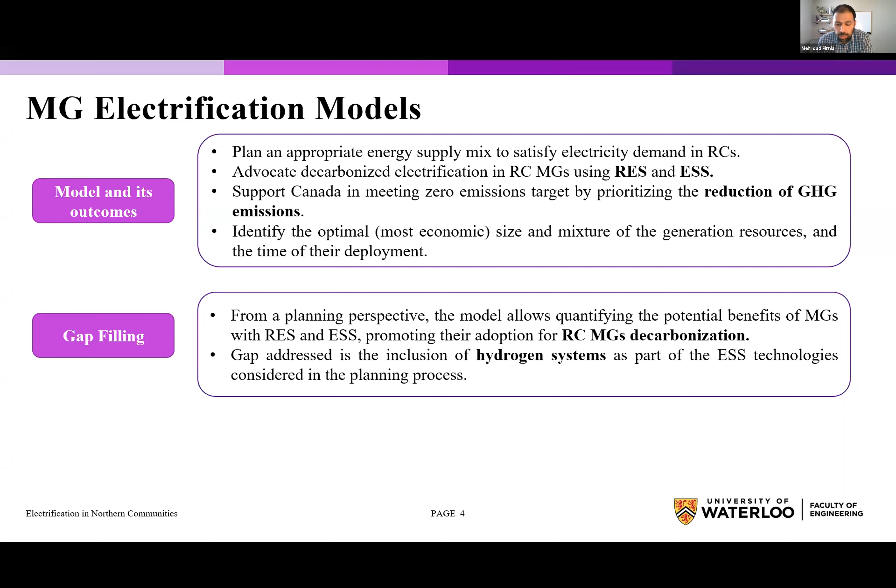The energy planning model that we have in place is based on a mixed integer optimization model, which has a cost minimization objective function. It has a set of parameters and decision variables, and technical, environmental, and economical constraints.

For the objective function of the model, we minimize the total capital costs and operations and maintenance costs by including both operational and planning constraints of the model. The variables are binary - we are including binary variables for both on and off status of diesel generators, charging and discharging status of the batteries and hydrogen storage, and also purchase of diesel generators.

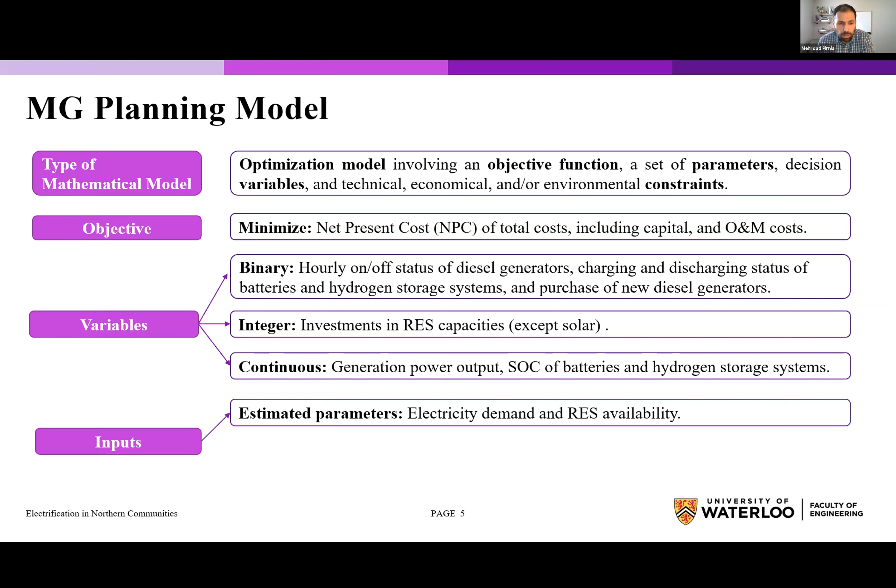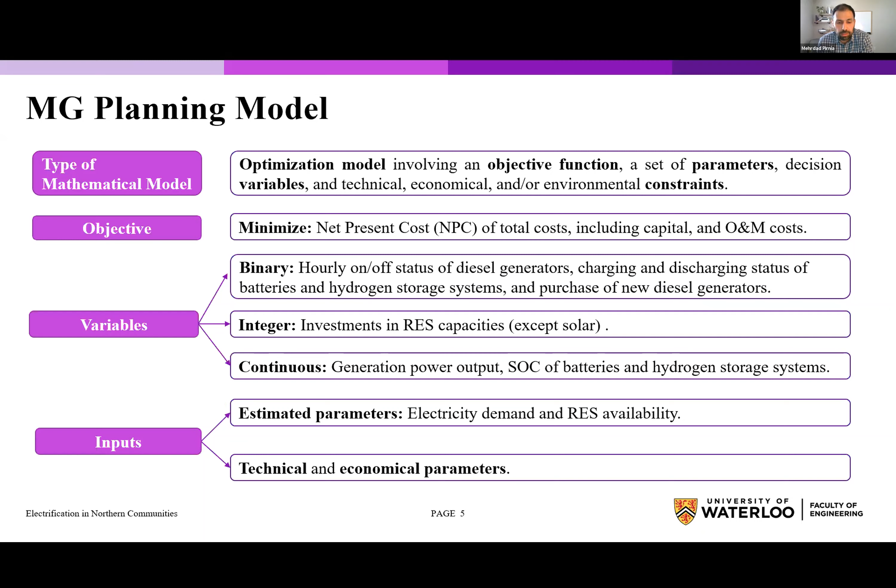They're also integer to represent the investment in renewable energy sources. And the continuous variables from the model are to illustrate the generation output, state of charge of batteries, and hydrogen storage capacities. So the inputs of the models are estimated parameters based on the electricity demand and renewable energy source availabilities. We also have a set of technical and economical parameters depending on the technologies that we're using, and depending on the socio-economical area that we are locating the microgrids at.

So again, the output after solving the model would be the net present cost of the investment. We can easily find the net present cost of the investment for new diesel generators, renewable energy capacities, and energy storage systems. We can also find the net present cost of the operations and maintenance for both new and existing diesel generators, renewable energy sources, and energy storage systems.

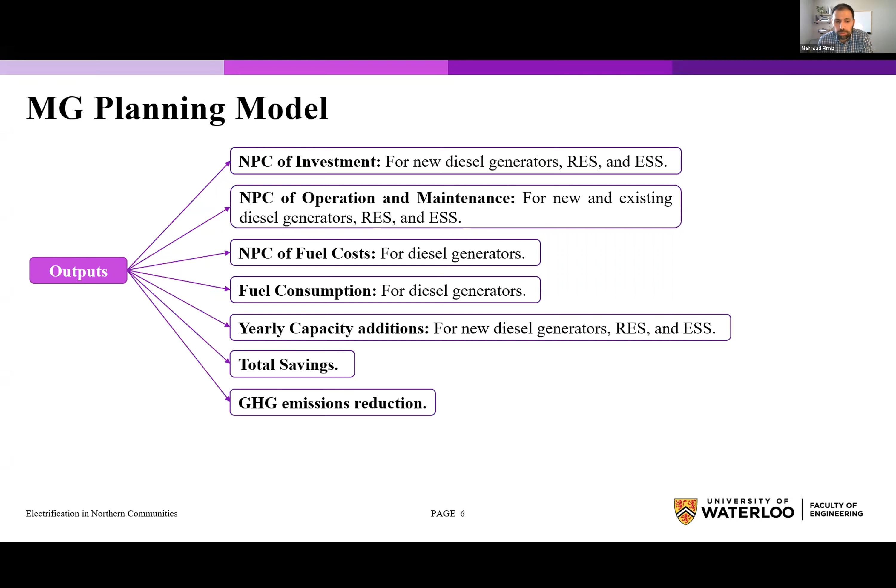We can estimate the fuel cost of the diesel generators and their fuel consumption, the amount of fuel consumption they have. We can plan for the annual capacity additions for new diesel generators or renewable energy sources, and energy storage systems. And then we can obtain the total savings and GHG emission reductions from the model.

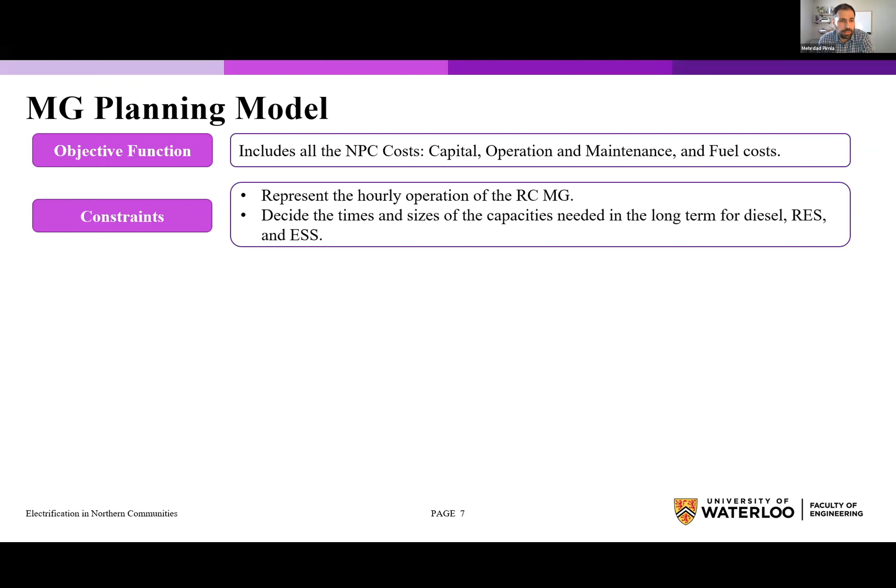So again, the objective function of the provided model includes all the net present cost - capital, operations and maintenance, and fuel costs. The constraints that we are including represent the hourly operations of the remote communities, where they decide the time and the size of capacities needed in the long term for diesel, batteries, and fuel cells.

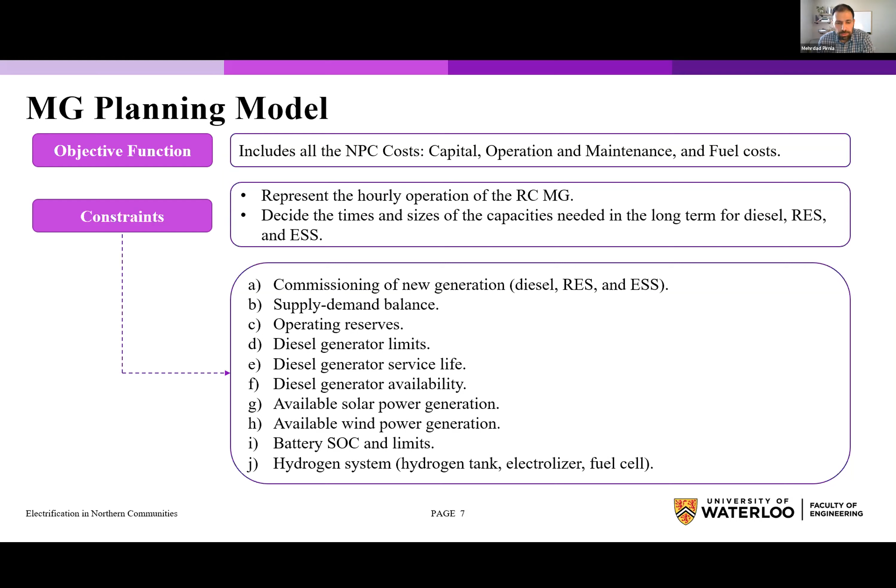Also, the set of constraints we have includes commissioning of new generators. The model is versatile to include different sources of generation. We have supply-demand balancing constraints, and we include operating reserves in the model. We also include limits for the diesel generators and their service life, and their availability during the time horizon of the planning model. And we also consider the available solar power generation and wind power generation, the state of charge of the batteries and their limits, and the hydrogen system constraints.

The model that we developed uses GAMS, and to give some perspective on how we solve it, we use a Cplex solver. Just to give you some context, the results that we are providing here were run using a server - a Xeon CPU with 256 gigabytes of RAM - but we can definitely run the model on smaller systems as well. The code is available upon request.

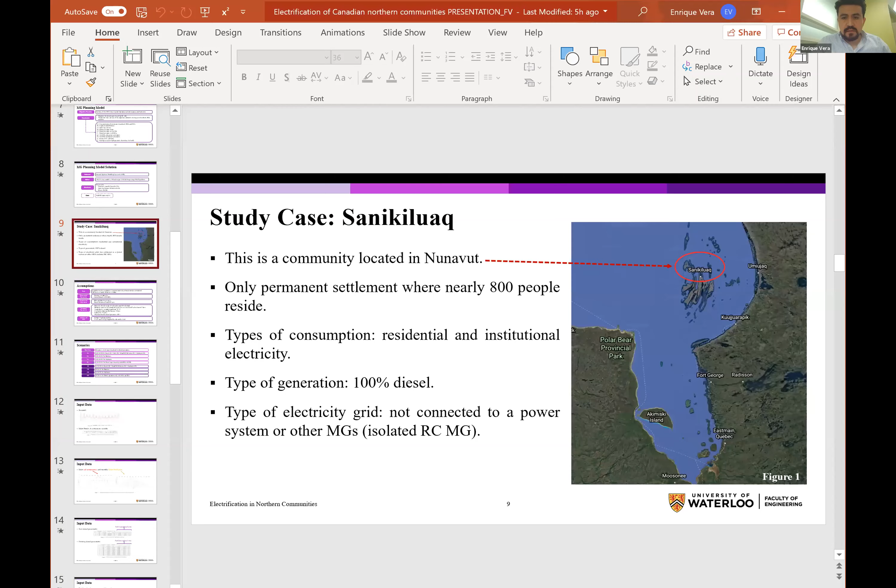I'm going to describe the study case. In this case, we use the community of Sanikiluaq. This is a community located in Nunavut.

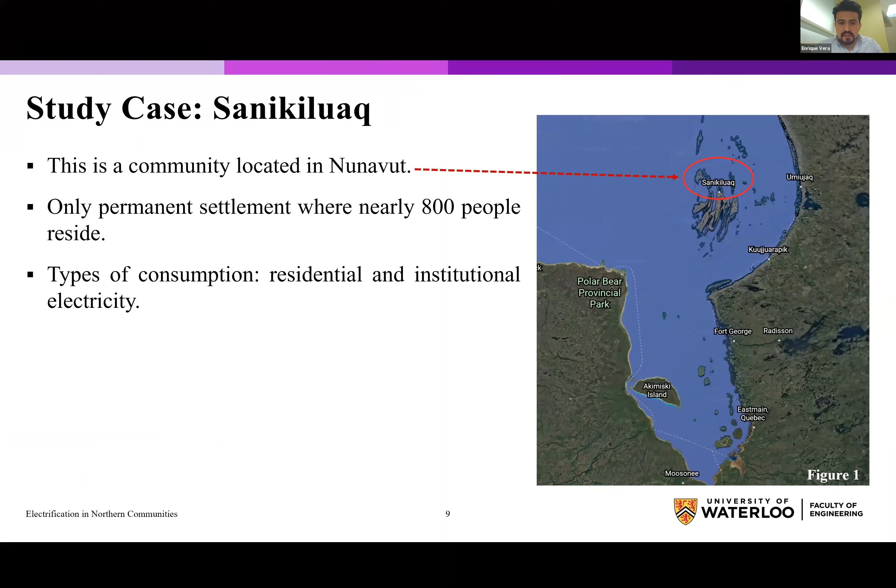It's the only permanent settlement where nearly 800 people reside. The types of consumption in this community are residential and institutional, but mainly residential. The type of generation right now is 100% diesel, and the grid is not connected to a power system or other microgrids there - it's an isolated remote community microgrid.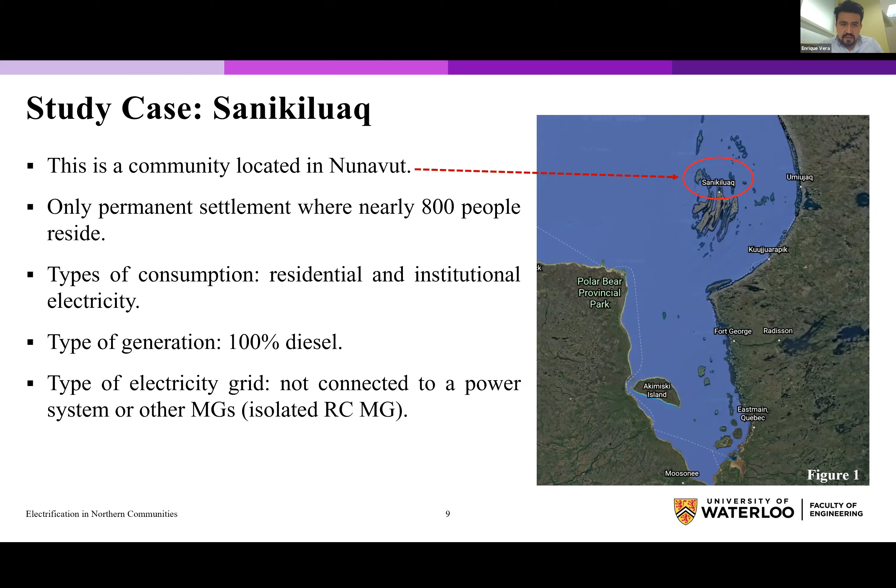The assumptions for this study case: first, the time we have considered a representative day for each month. Therefore, we have 288 hours for the simulation, just to reduce computational burden.

The economical parameters: we have a discount rate of 8%, cost of diesel of $2.39 per liter. We have considered 2 windows for investment for renewable energies and energy storage systems for the first 5 years. Then we can invest in new diesel generators, because the microgrid already has diesel generators, between the 3rd and the 10th year.

We have some technical parameters here: reserves, 50% for wind, 20% for solar, and 10% for load. We are not considering ramping up and down constraints, because the diesel generators can turn on and off in fractions of an hour. The temperature and standard conditions are 25 degrees Celsius.

We are also considering that the continuous charging and discharging of the batteries is 4 hours. We have considered a load growth of 1% per year, and a minimum load for diesel generators of 40%.

For the inclusion of renewable energies in this case, we have considered that for all the scenarios, at least one hydrogen system must be included, and 1% of the annual energy must be supplied by solar or wind. So we have our base case, that is business as usual, where the operation is based on diesel generators only. And then we have 4 case scenarios.

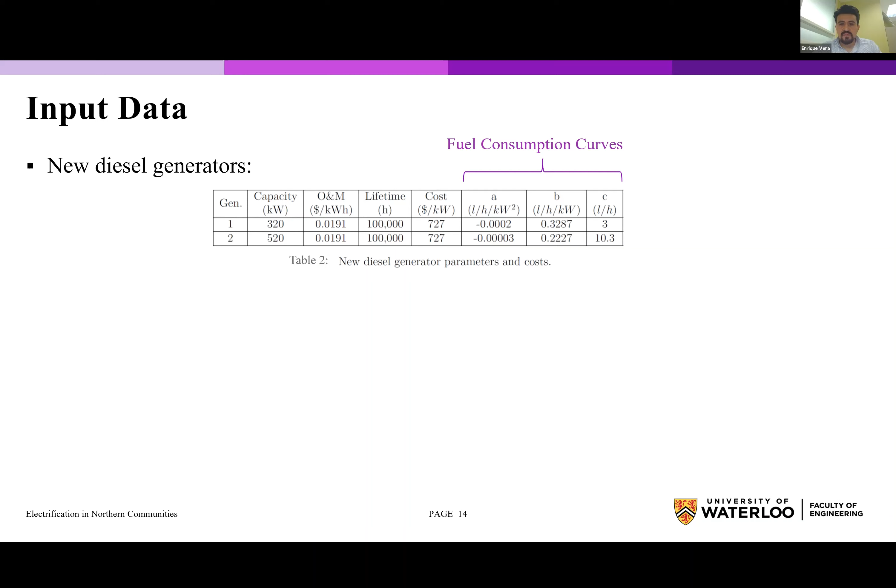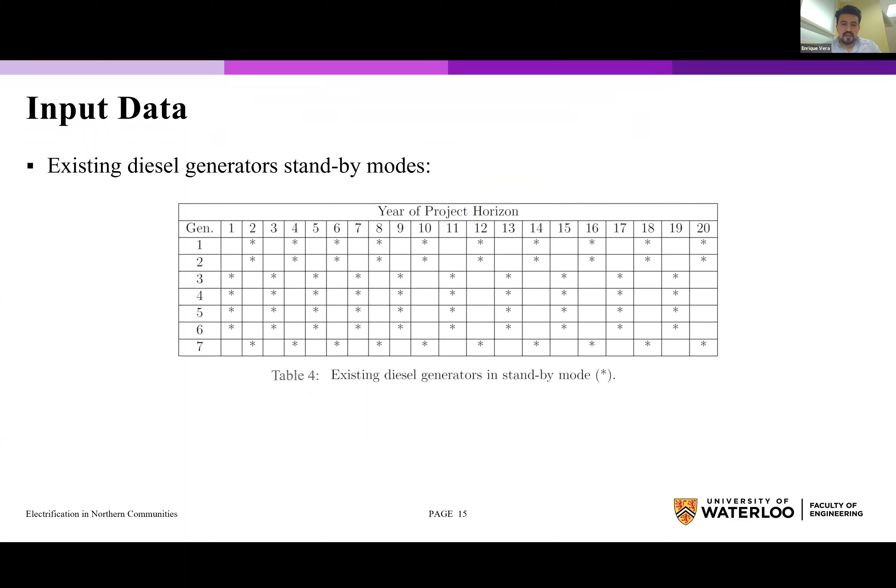The existing diesel generators with their fuel consumption curves - as you can see here, we have 7 existing diesel generators, and they operate in alternate years so they can preserve their useful life.

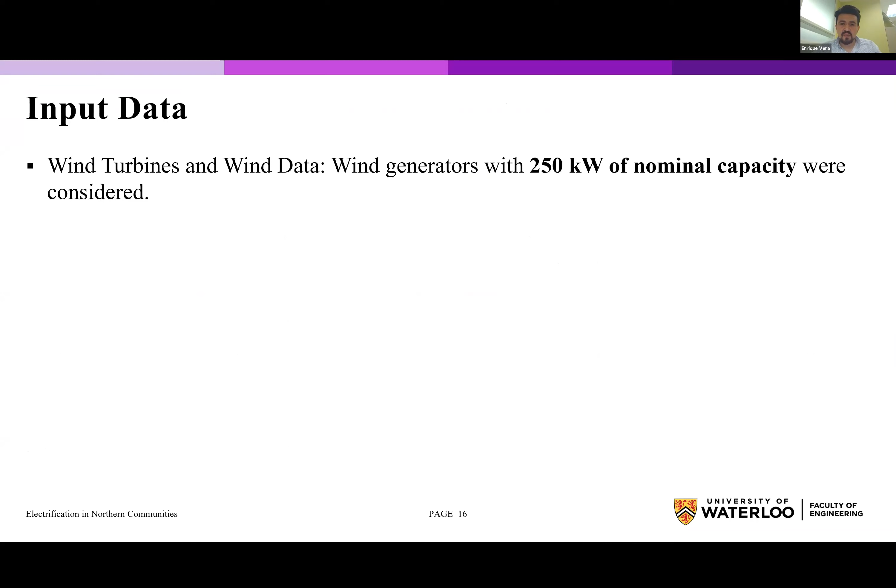For the wind turbines, we consider wind generators with 250 kilowatts of nominal capacity, and the wind speed ranges between 3.2 and 8.2 meters per second. With this wind turbine specifically, we can guarantee that 90% of the time we have at least 150 kilowatts of production.

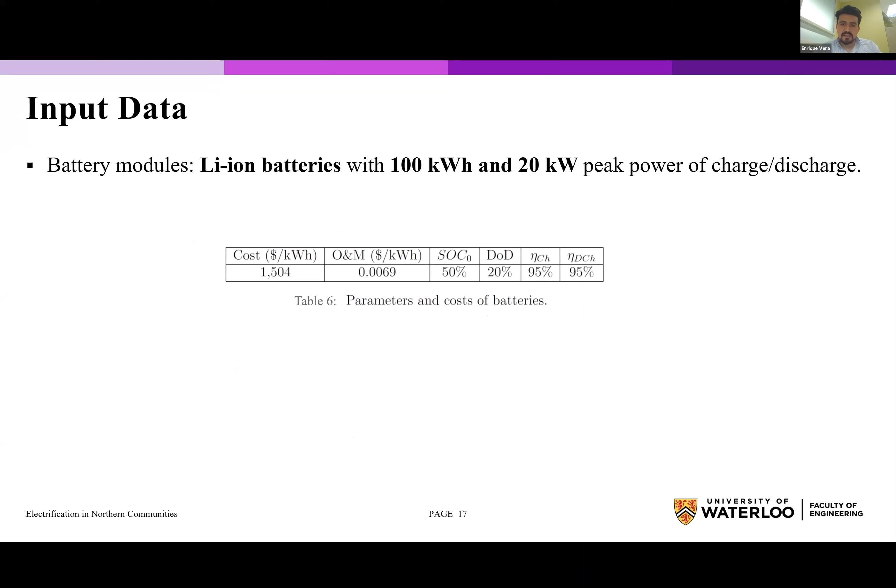For the batteries, we have considered lithium batteries with 100 kilowatt-hour capacity and 20 kilowatt peak power of charging and discharging with these characteristics.

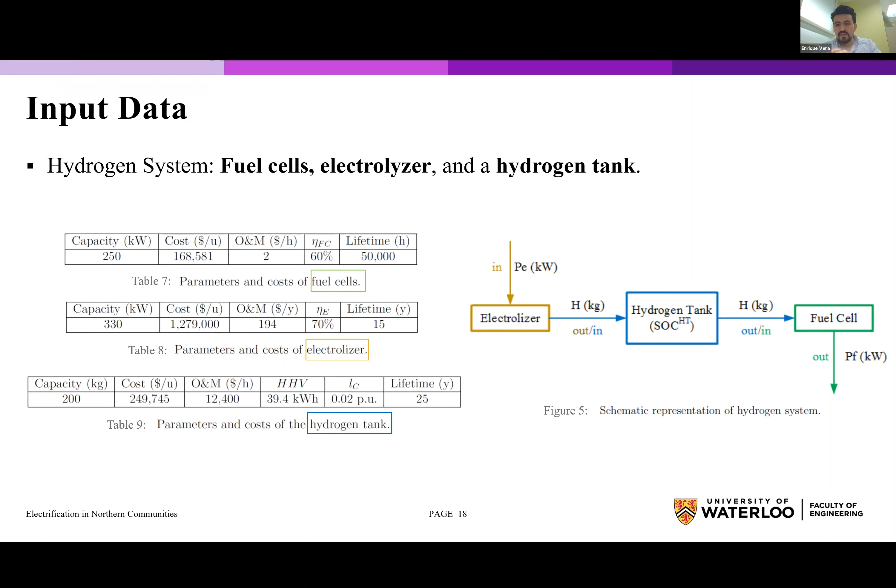For the hydrogen system, a full hydrogen system includes fuel cells with these characteristics, an electrolyzer with these characteristics, and a hydrogen tank. As you can see, the full hydrogen system includes an electrolyzer that consumes power from the grid to generate hydrogen, which is stored at high pressure in a hydrogen tank, and then later that hydrogen is used by the fuel cells to produce electricity that's injected into the microgrid.

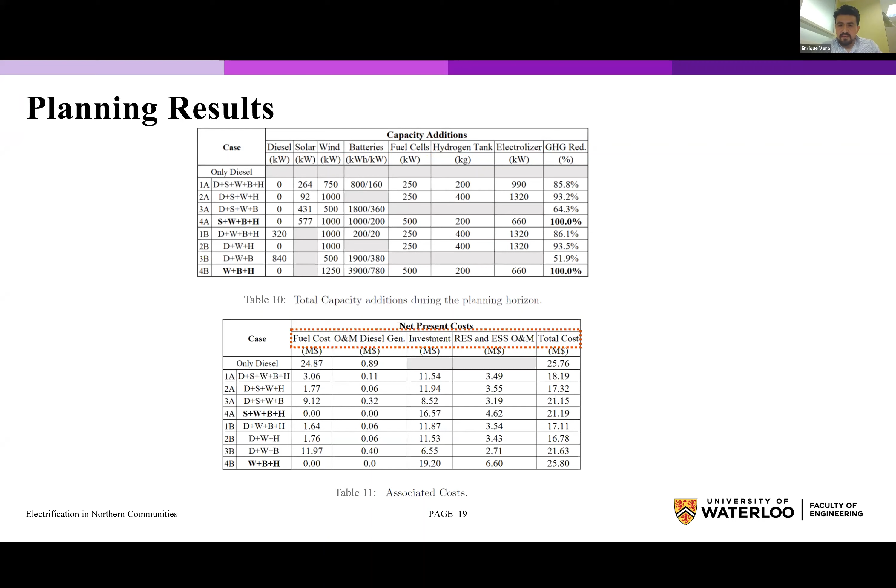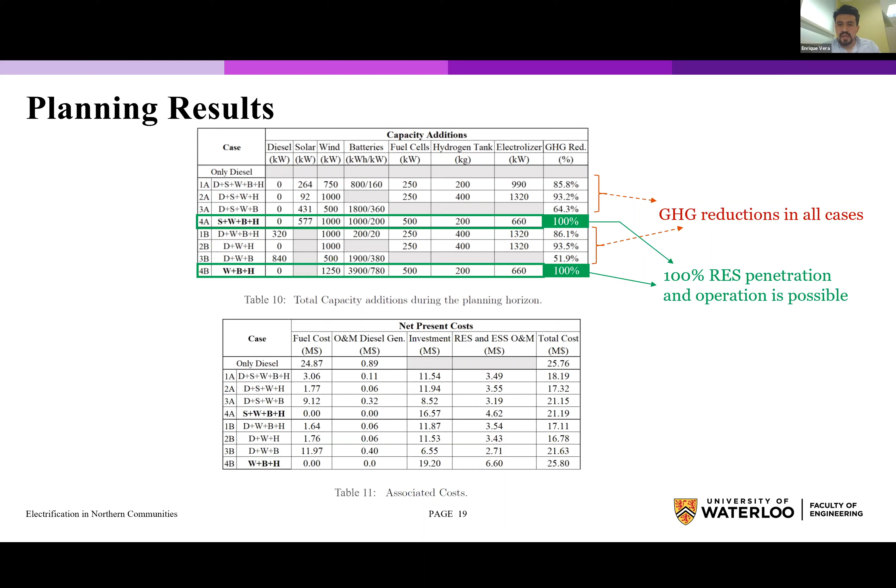We have found that in all the cases we have emissions reductions that go between 51.9% and we can achieve 100% emission reduction in case 4A and case 4B, because we are not using diesel for the operation. This also means that we have 100% renewable penetration and operation.

Also, we've seen that we can achieve savings in all the cases. We have the total cost for the base case, business as usual, as 25.76 million. That includes operation and maintenance cost and also fuel cost. And we have savings in the order of 16 to 34%.

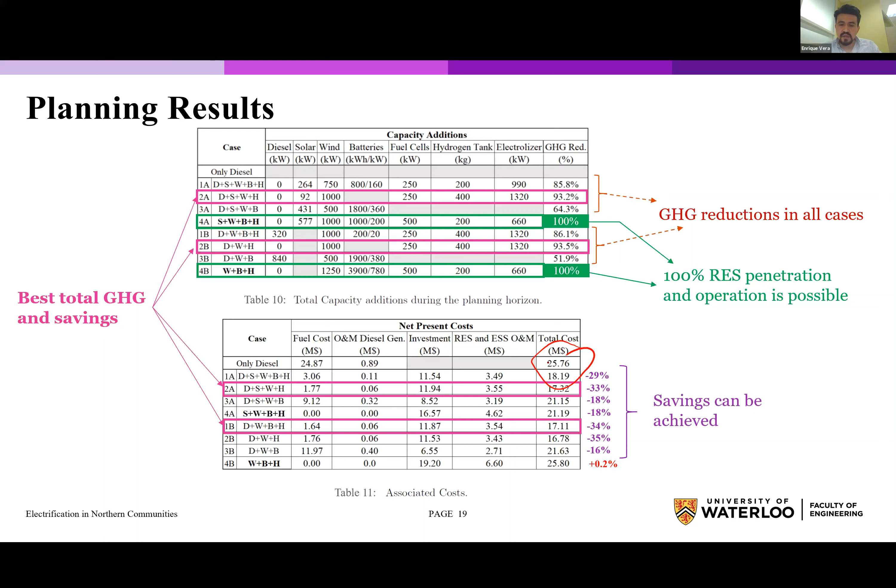There was only one case that increased the cost, and that is case 4B. The reason for that is because we don't have solar. Finally, the best total emission reduction and savings were case 2A and case 2B, where we can achieve reduction in emissions up to 93.5% and a reduction in the total cost of operation and investment of the microgrid of 34%.

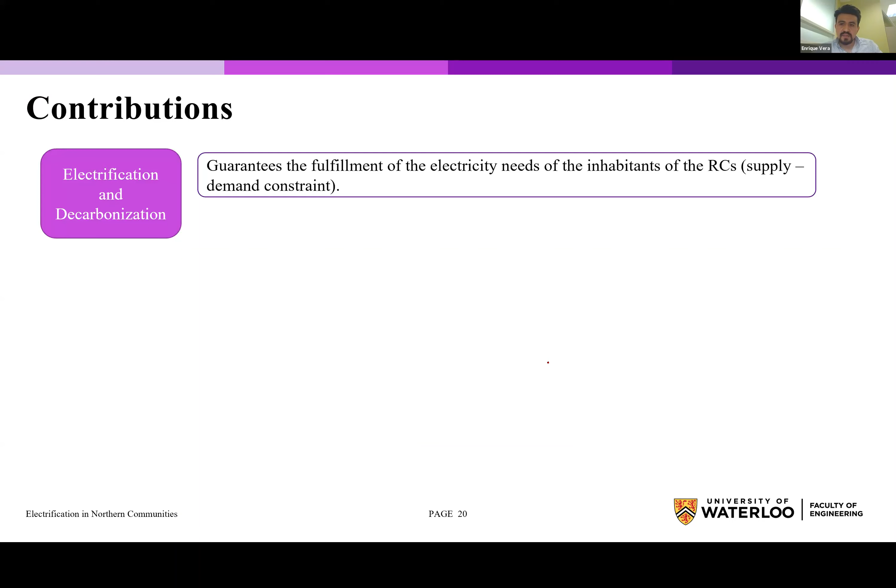The contributions of our model: this model contributes to electrification and decarbonization because it guarantees the fulfillment of the electricity needs of the inhabitants of remote communities, mainly through the supply-demand constraint. It reduces uncertainty related to the prices of fossil fuels by integrating renewable energy sources and energy storage systems.

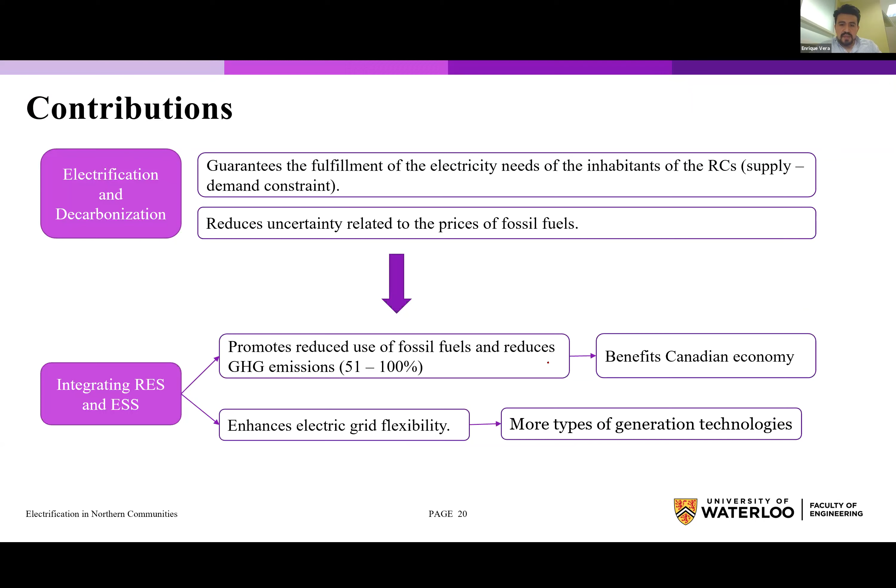This promotes reduced use of fossil fuels and reduced GHG emissions, as we saw, between 51% and 100%, which benefits the Canadian economy. This also enhances electric grid flexibility because we have more types of generation technologies serving the microgrid. All this supports Canada in meeting its zero emission target.

In policy design, this model can be used to design policies aligned with energy sustainability and affordability for remote communities in Canada, as the model facilitates the consideration of environmental, economical, and community factors.

As part of a national platform, this model can be used by experts, researchers, investors, and policymakers, as the model helps to determine requirements for financing, construction, management, and real-time operation of remote community microgrids. This can incentivize cooperation in order to create products, services, and strategies that help mitigate and solve energy-related public problems for remote communities.

Future work will be to apply the model to address the needs of remote communities in Canada, because as we mentioned before, they have special needs, and it's important to take them into consideration. Also consider more sophisticated methods to incorporate uncertainties in the proposed model. And finally, test the reliability of different generation mixes.